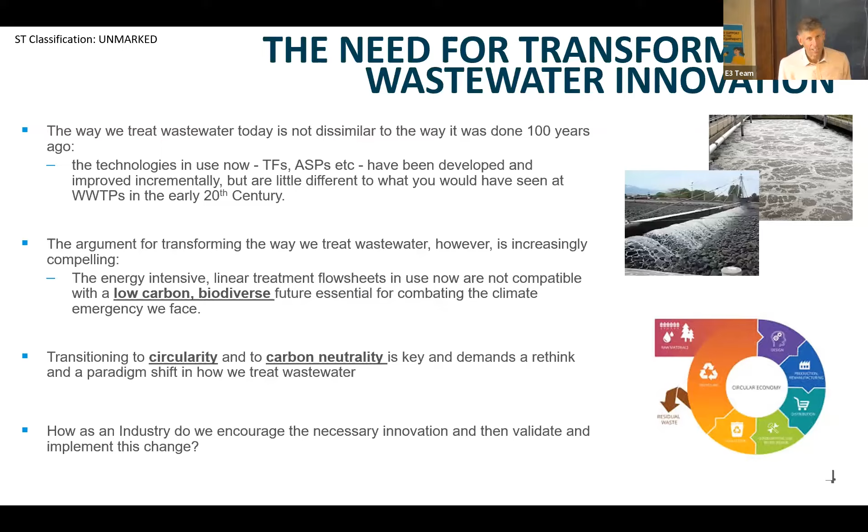A bit on carbon strategy - it's definitely not a new ambition. Back in 2007, in our strategic direction statement, we talked about minimizing our carbon footprint. But it's fair to say that the focus on carbon has intensified massively over the last few years.

Our plan now is to get to net zero, and that's in our strategic direction statement. It's part of a UK-wide, England and Wales-wide net zero route map, where we as a sector have signed up to being operationally net zero by 2030.

The reason we need to do that is because it's becoming more and more clear that the climate emergency is a huge threat. I was at Cranfield University yesterday talking to a climate professor, and it's not that we're at one minute to midnight - we're probably one minute past. If we don't act very, very quickly, we're in big trouble. The likelihood is we're going to have to learn to live with a much warmer world as it is.

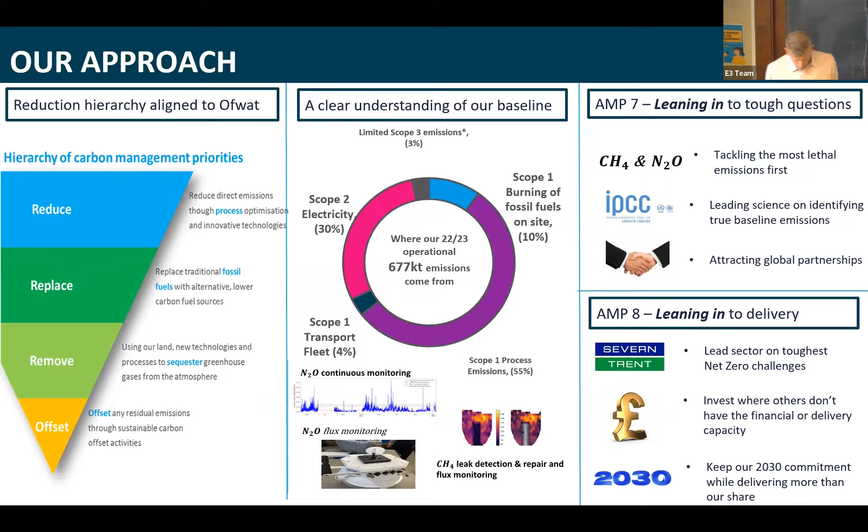So our approach very much is to collaborate to find the answers, because we know we're not going to find the answers internally. We need to get out there, scour the world, join European projects such as this one to help find those answers.

So we have quite a developed ecosystem now, and it's taking quite a lot of effort. I've already talked about the net zero partnership with Aarhus Vand and Melbourne Water. We've got a World Water Innovation Forum, with the likes of PUB in Singapore, Aqualia in Spain, a couple of North American utilities, South American utilities, and Australian utilities, where we share knowledge.

And then we've got very strong relationships with academia. We run competitions both internally within Severn Trent and with our customers to try and get ideas generated. So we're spending a lot more effort perhaps than we did historically on finding those clever ideas.

In terms of our R2IC, our Resource Recovery and Innovation Centre, that was something we built a couple of years ago - quite an investment, but it's brilliant in that it's a plug and play facility. We can bring technologies in to help speed up the development and do it at a scale that's pretty representative. So this is effectively the final step before you would fully implement on a live wastewater treatment plant.

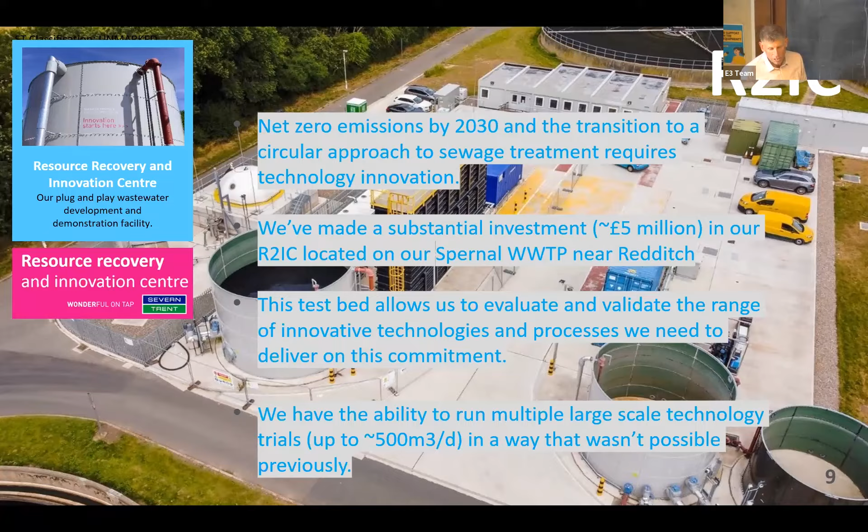It's a safe place to play, if you like, because the effluent is based on a treatment works. It's a roughly 2,000 population equivalent mini works, but we can return the effluent to the head of the works for further treatment. So we've been running a number of trials over the last couple of years.

Examples of - I'll talk a bit more about anaerobic treatment of wastewater. That's the big plant you can see at the top of the picture, an upflow anaerobic sludge blanket reactor, ultrafiltration membrane degas. But we've also done work on the CirTec cellulose recovery equipment, on enhanced primary treatment. I've got a slide to talk about the development work we did with membrane aerated biofilm reactors.

We're working with Suez on photocatalytic covers to destroy nitrous oxide. Most of our process emission monitoring work, the development work, has been done on this site too. So this is our main wastewater innovation site.

So I'll give you a couple of examples of how we can work with academia and technology providers to speed up the development of technology. I think this is a really good example of when that works well - and of course they don't all work as well. There are plenty of examples where we've done quite a lot of development work and not got to a point where we feel the technology is either feasible, viable economically, or desirable in terms of whether it fits with our strategy.

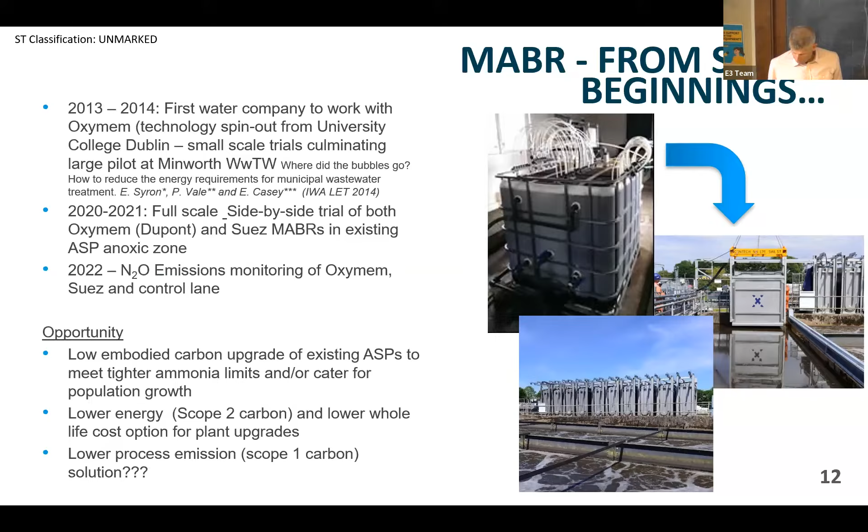So yeah, nice process. The other one I'll quickly talk about is anaerobic MBR. This offers a vision for the future, I think: energy neutral, chemical free, carbon neutral, no process emissions or minimum process emissions because you're not nitrifying, and resource recovery allows you to recover ammonia and phosphorus.

So anaerobic treatment has been around for a while, used in Brazil and other parts of South America particularly. To get it to work in colder temperate climates is a challenge. You can intensify it by having an ultrafiltration membrane, returning all the bacteria to the reactor.

And of course, that UF plant also gives you a solids-free effluent that still has the nitrogen and phosphorus in it, which you can then use ion exchange, for example, to recover. So it's a way of recovering ammonia from the mainstream rather than the side stream, which is really exciting. You're not nitrifying, so you're not producing nitrous oxide.

However, you do have lots of methane dissolved in the effluent because it's cold temperature. So you need a way of extracting that dissolved methane. We've worked with a membrane contactor technology, 3M membranes. That's the biggest challenge - I wouldn't say we've cracked that yet. There may be other options available to do that, but it's a really exciting technology still in development.

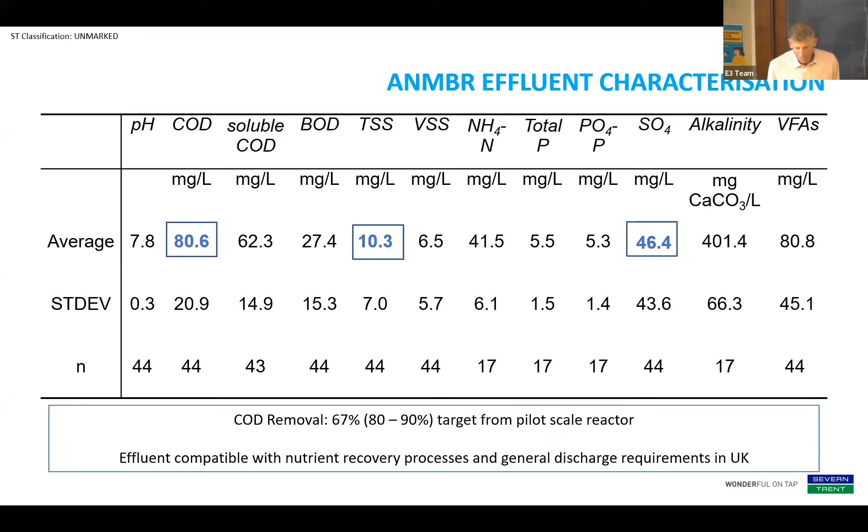So the pilot scale, mainly done at Cranfield University, shows that you can get up to 90% COD removal even at very low temperatures. We were more like 70%, and we think that's because of that sulfate challenge.

So finally, I think I'm probably running out of time - the Net Zero Hub. The culmination of all this work, I guess, is to really try it at proper full industrial scale on one of our large treatment works. And that's what we're doing now. We've secured a considerable sum of innovation funding, 10 million from Ofwat's Innovation Fund, and we're adding another 20 million to convert Strongford to our net zero works. Carbon neutral by next year is the intention.

It's important to say that it's not just the Severn Trent project, it's something that the sector is supporting. So all the UK and Irish water companies, both Northern Ireland and Irish Water, are supporting this project, as are our net zero partners. The learning is going to be shared across the sector. It's our biggest externally funded project to date, and we're now on site doing the building work with an ambitious target of getting it up and running by April 24, which is a lot quicker than most of our engineering projects.

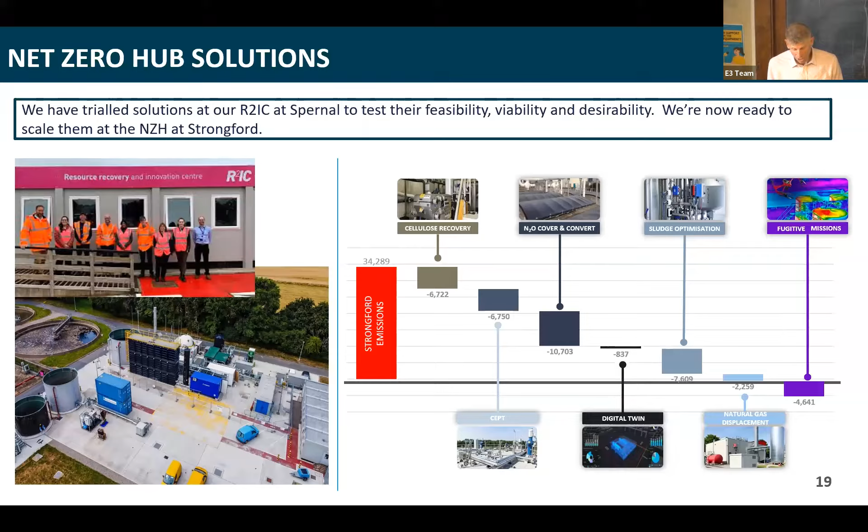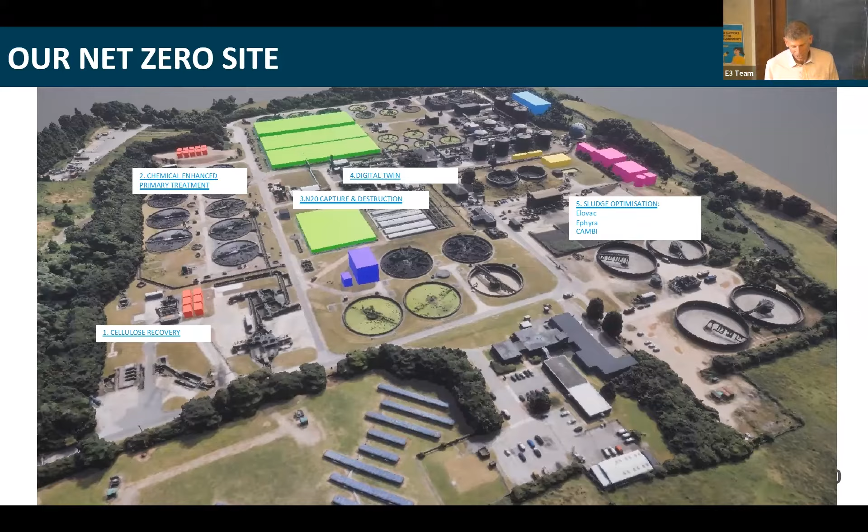That's sort of what it will look like, a bit of a mock-up, but just to give you a sense of the scale of the plant. It serves the city of Stoke-on-Trent, 400,000 population, so a really exciting project.

But we don't want to stop there, and I guess my role now is to think about phase 2. This includes some of the great stuff that you've been working on.

We're looking at advanced thermal conversion of sludge, could be cellulose as well, of course, activating that, using that to remove maybe phosphorus, maybe microorganics, forming organomineral fertilizers, recovering ammonia. There's so many links that the whole circular economy opportunity is massive.

So these are just sort of ideas really at the moment, but this is going to be phase 2 - how do we really go further to make full value and recover energy, material and water.

So in conclusion, I know I'm preaching to the converted, but it's my absolute conviction that we need to transform how we treat wastewater to be compatible with this low carbon, biodiverse future that we need. Thankfully, innovators like your good selves are coming up with loads of potential circular solutions, but we've got to be really good at collaborating to ensure widespread and rapid adoption.

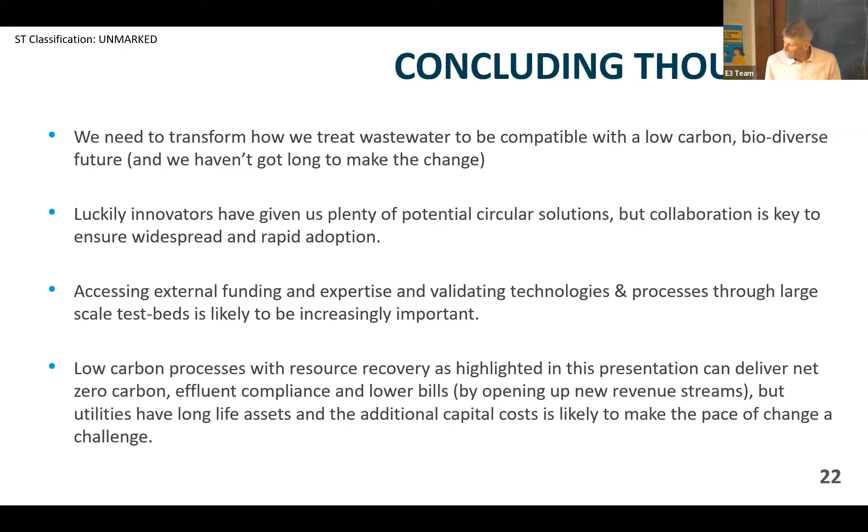Thank you, Peter. Now I'm going to sit next to you, otherwise they won't see us on the camera. Are there any questions? Because I can't see them, John. No, there are no specific questions. Are there any questions here in the audience for Pete relating to this very nice overview of all the things that are going on at Severn Trent? Yeah, I don't think so.

Yeah, absolutely, so you're right, and I recognize the BOD concentrations are relatively high. So what we could do is between the UASB and the nitrogen and phosphorus recovery, we need an additional carbon reduction step.

Possibly. So I hope people at home can hear the question, so maybe you should repeat the question before you answer it. Make it a bit more complicated. No, good point - and if I miss anything, shout out and let me know.

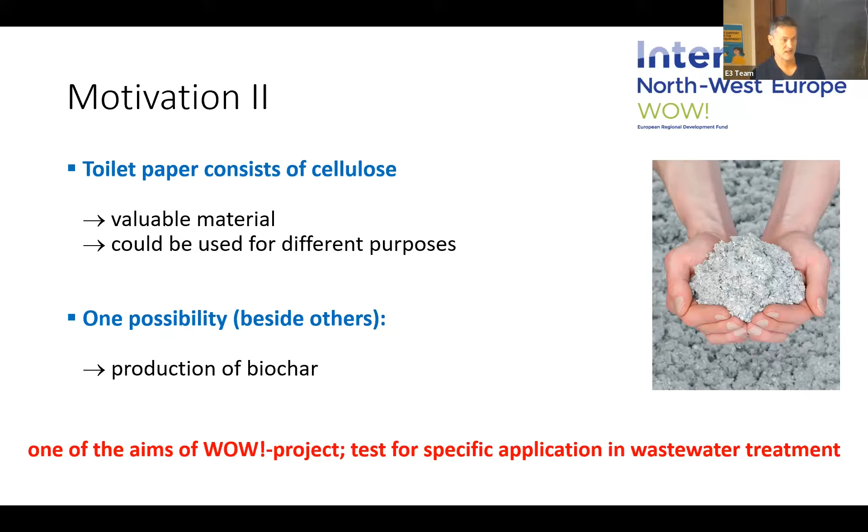But on the other hand, toilet paper also consists of cellulose, and cellulose is a very valuable material that could be used for a lot of different purposes. One possibility to use the cellulose in toilet paper is the production of biochar, and this was one of the aims in the WOW project. Our idea was to produce biochar, to valorize the toilet paper and test it for specific applications in wastewater treatment. The question now is, how can we recover the cellulose?

This is not what I'd like to show you. I'm sorry, there was something going on, but never mind.

When you look at conventional wastewater treatment, we have the possibility to install a fine screen between the primary sedimentation tank and the grit chamber. Here we have the possibility to recover the cellulose, and the main advantage of installing the fine sieve in between is that after the initial screening and the grit chamber, most particles that would hamper the further process, all the large solids but also the sand, are already removed.

Now let's come to the recovery of cellulose in the sewage treatment plant. Pete already mentioned a Dutch company named CIRTEC, and they developed a specific technology. In the frame of the WOW project, they installed that technology as a demonstration plant at a wastewater treatment plant in Ede, Netherlands, and operated it for a specific time. That technology is a four-step process.

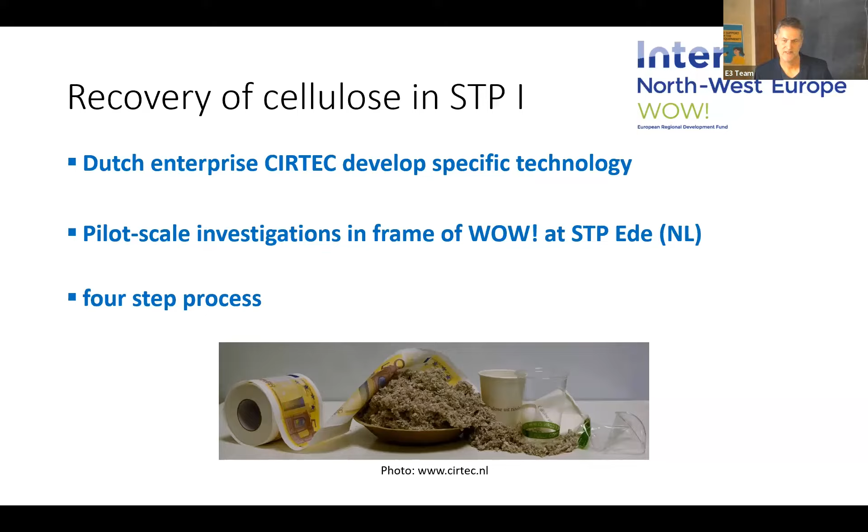The first process is the cellulose washer. I have to remind you that all the large solids, like large screenings, and also the sand, are already removed from the wastewater. But what we still have in wastewater is, for example, hairs, fibers, small plastic, and small organic particles. In that first stage, the cellulose washer, these particles are removed from the wastewater by a mixture of air and water.

The second step is a fine screen, a rotating filter mesh for capturing the cellulose. What we do is feed the wastewater onto the mesh, the wastewater drains through the mesh, and finally we have a layer of cellulose on that mesh.

The next step is a dewatering step, meaning the particles from the sieving are dewatered by a press, and finally we have a water content of about 50%.

The last and final step is a drying and pelletizing step, which means the pressed material is dried in two steps with air and flue gas, and then converted into pellets of about 6 millimeters diameter.

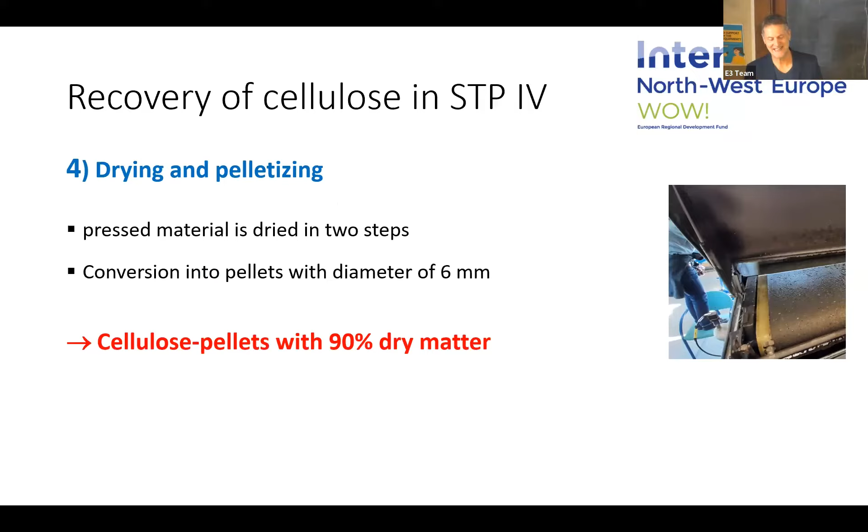Something went wrong here with the presentation, I don't know what, because this is not the picture I'd like to show. I'm sorry. But finally, what we have are cellulose pellets with 90% dry matter.

The question now is what to do with the cellulose. What we decided in the WOW project is to use the cellulose as biochar. We have different other possibilities too, as Peter also mentioned. During the process of pyrolyzation, we also get bio-oil that could be used for heating purposes or blending fuels. We get a gas, and another possibility is acetic acid that can be used for improving denitrification at the wastewater treatment plant.

But what we did in the WOW project is use the biochar as a supporting material in so-called constructed wetlands, as an additional step after the conventional treatment.

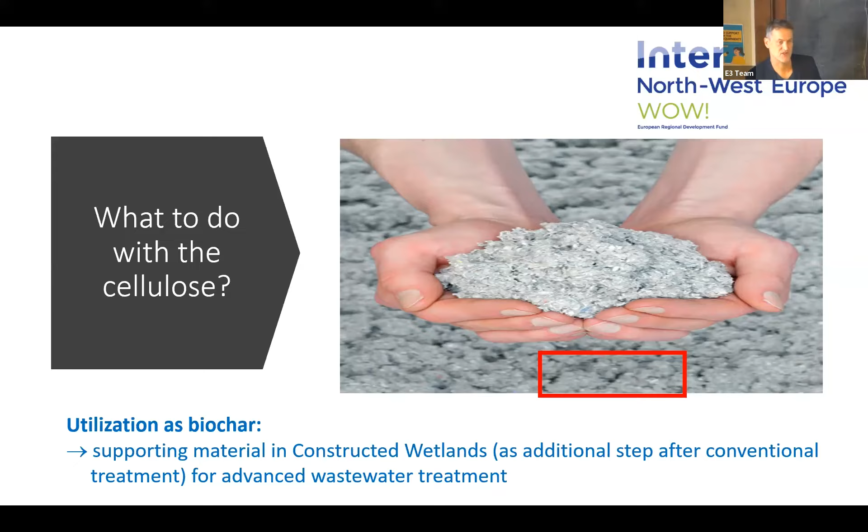With the aim of micropollutant elimination. I don't know if everybody knows what a constructed wetland is, so I'd like to briefly summarize. A constructed wetland is a nature-based system for wastewater treatment.

It's used for several purposes in wastewater disposal. Most of you may know constructed wetlands as a decentralized treatment step for small units, for example 200 to 500 population equivalents, as the main treatment step to remove BOD, ammonia, and phosphorus. But constructed wetlands are also used as an advanced treatment step for stormwater and combined wastewater. We know they are great in removing micropollutants, BOD, COD, ammonia, phosphorus, and they have a high capability to remove heavy metals.

When we started working with constructed wetlands, our literature study showed there are first approaches for the elimination of micropollutants with constructed wetlands. We started this work in 2017, so we have 6, nearly 7 years of experience, and we carried out many different projects, learning a lot from them, especially through Interreg projects: first the EmiSûre project, and the other the CoMinGreat project. Let me summarize a little what we learned.

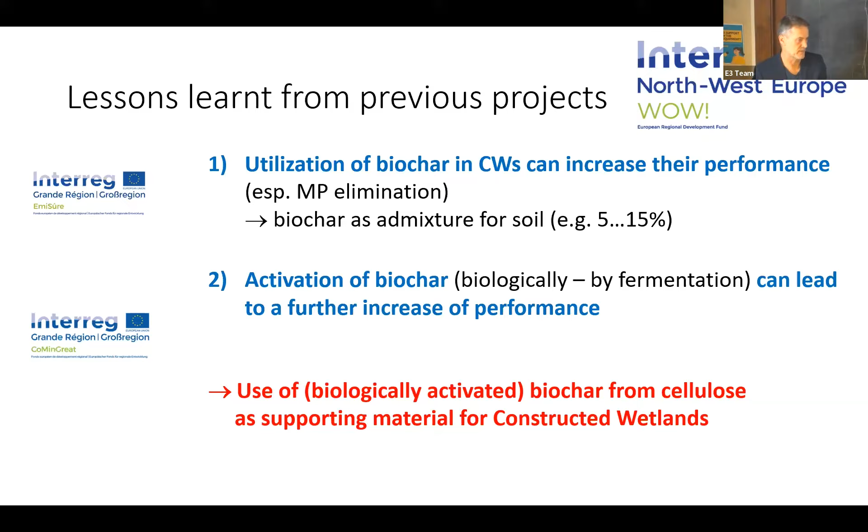The second lesson we learned is that activation of the biochar, especially biological activation through fermentation, can further increase performance. So the idea of the WOW project was to use biologically activated biochar produced from cellulose as a supporting material in constructed wetlands. These constructed wetlands are used as an additional step for targeted micropollutant elimination in wastewater treatment plants, especially for small and medium-sized plants.

Coming back to our wastewater treatment plant, what we have are these cellulose pellets, 6 millimeters, 90% dry solids. Now we have to valorize these pellets, valorize the cellulose. In the frame of the WOW project, these cellulose pellets were transported from the wastewater treatment plant of Ede to a small German company called Klimapharma for valorization.

Klimapharma has a lot of experience with biochar, and in our discussions, based on their experience, they proposed producing 3 different types of biochar: first, biochar made from 100% cellulose; second, biochar made from 50% cellulose and 50% straw; and the third option, 50% cellulose and 50% wood.

Now we have to valorize the cellulose pellets, and this is done in 2 steps. The first step is a carbonization step. On the sheets we saw, for example, pyrolization - it's the same as carbonization, a well-known process for more than 100 years used for the production of charcoal, for example.

What Klimapharma does is carbonize at low temperature, between 600 and 800 degrees. The reason is to reduce the loss of organic material, because when you carbonize at very high temperature, you go more in the direction of biofuel and gas, and you lose a lot of organic material and lose the biochar. The residence time in the reactor is between 2 and 6 hours.

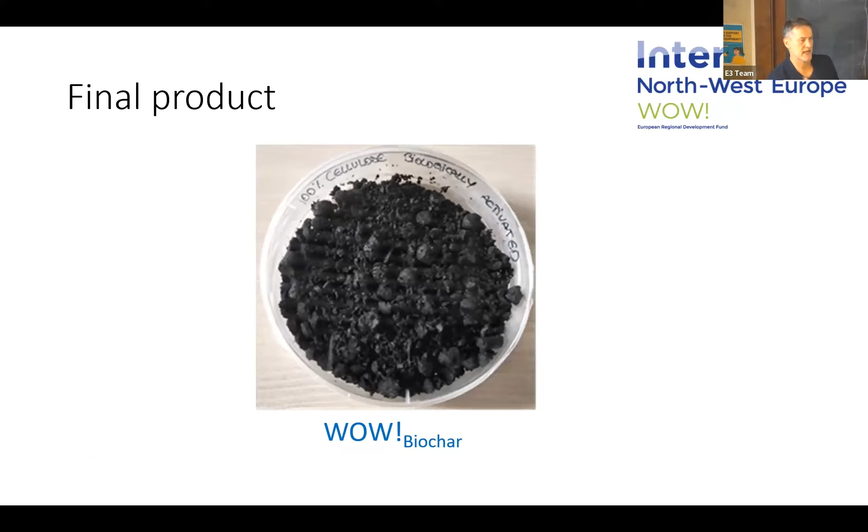And this is the final product, which we call Biochar. So we have 3 different types of biochar: the biochar made of cellulose, and the 2 types mixed with straw and with wood.

Okay, the question now was, which kind of biochar should we use? The cellulose or the mixtures? Okay, what we decided was to make some pre-tests in the lab.

When you look at the processes and mechanisms in a constructed wetland, you can see the removal is based on several processes. For example, we have photodegradation by sunlight, and uptake of pollutants by the plants. But the main processes for micropollutant elimination are adsorption by the soil material and biodegradation by bacteria, which mainly takes place in the first 15-20 centimeters of the soil, because here bacteria, fungi, and plants work closely together to remove the pollutants.

So what we decided is to make some pre-tests in the lab for adsorption capacity, and I'd like to show you some results afterwards, and also for the biological removal capacity of the material we used.

I'd like to explain briefly what kind of experiments we did in our lab. First, we did adsorption tests with batch tests on a shaking table. The purpose was to look for general removal rates for a dye, indigo carmine, as a proxy for the micropollutants, but also for selected micropollutants. So the aim of the batch test is to look for the removal rates - what is possible to eliminate regarding micropollutants and dye.

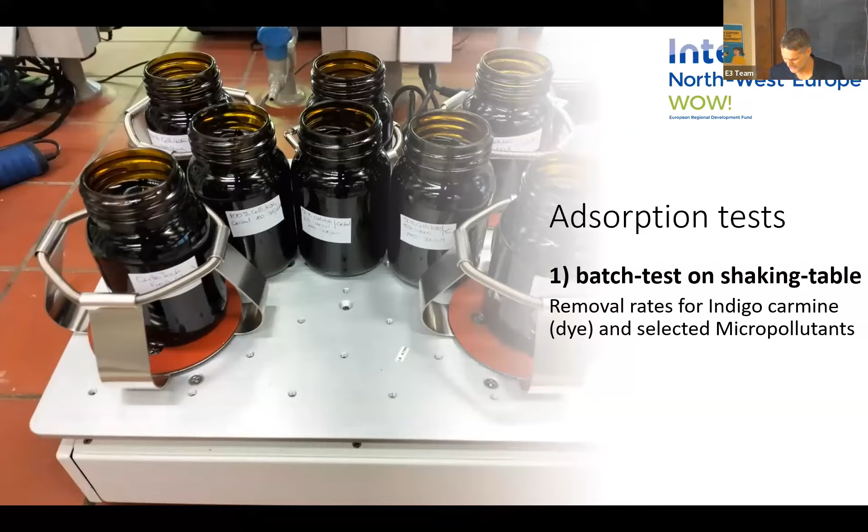The second test we carried out in the lab was a continuous test with a facility called a rapid small-scale test. I'm really sorry, I don't know what happened with the presentation. But the idea of that rapid small-scale test is to look for the long-term performance of the removal, so what we see are so-called breakthrough curves, and I'd like to show you an example afterwards.

To summarize, we tested indigo carmine dye and selected micropollutants. We did tests with non-activated and activated material, also in different sizes - for example very fine material to simulate powder activated carbon, but also coarser material to simulate granular activated carbon. And we did tests with pure cellulose and with mixtures of cellulose with straw, and cellulose with wood.

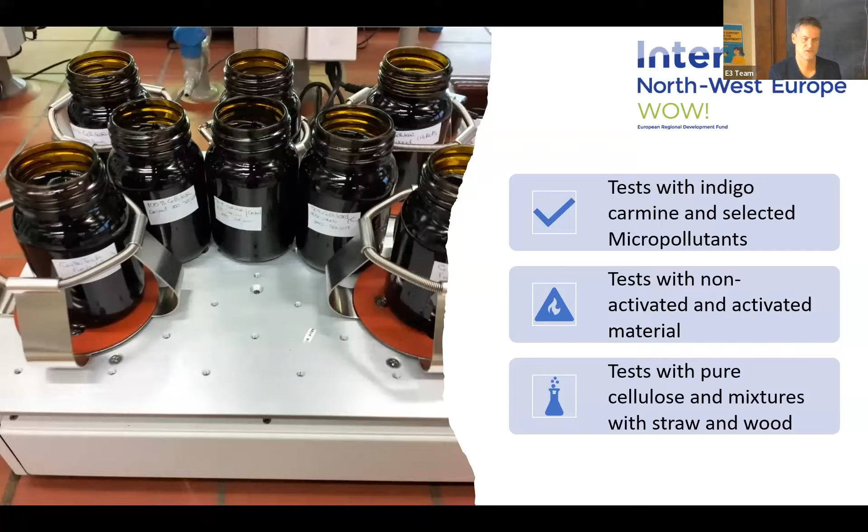To summarize, we saw that the mixture of cellulose with wood had the lowest adsorption capacity for indigo carmine and also for the micropollutants. The 100% cellulose and the mixture of cellulose with straw showed similar behavior for adsorption. But what we finally saw is that the mixture of cellulose with straw showed the best performance for the combination of adsorption and biodegradation.

So finally, we decided to carry out further tests at another scale - in mesocosm, but also in a pilot scale on a wastewater treatment plant - with that mixture of cellulose and straw and with the activated material. The results will be presented by my colleague Venditti afterwards.

To summarize, cellulose is a valuable product that could and should be extracted from wastewater. It's very easy to integrate the technology into the conventional process of wastewater treatment. By carbonization and biological activation, it's possible to produce an activated biochar, and that biochar can be used for different purposes, for example for micropollutant elimination from wastewater in constructed wetlands.

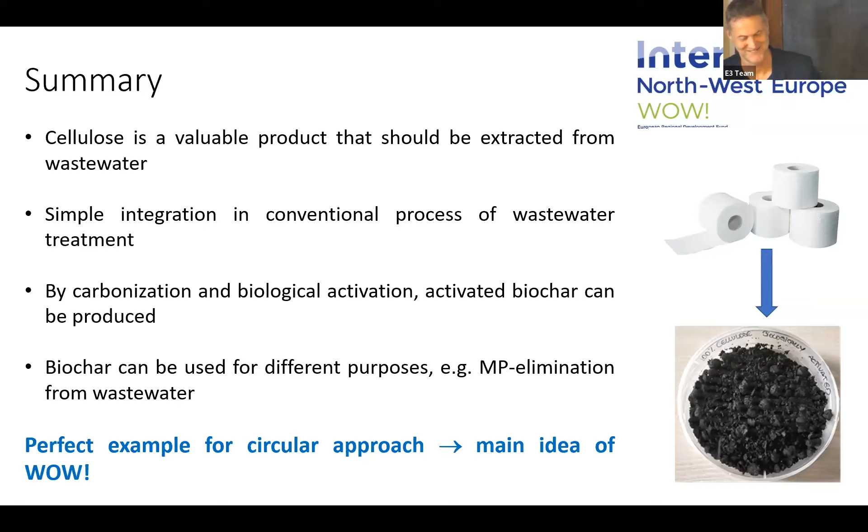Thank you for your presentation. So when you are mixing cellulose with different ratios of wood and also straw, why do you think straw is performing better than wood? Is there any structural difference, or the humus behind it, or? So the question is if Jo can explain why the combination with straw gave the better results with the elimination.

What we saw, for example, is that the active surface changed. The active surface was higher when we mixed the cellulose together with other compounds, and the active surface is very important for the adsorption capacity. I think the other thing is that in a constructed wetland, we have to offer the bacteria and fungi good conditions. You can imagine that cellulose is a quite inert material, and when we mix it with a more living material, that may offer better conditions for the bacteria and fungi in the constructed wetland. Because what is very important for removal in a constructed wetland is really the combination of different processes. It's not only adsorption, because otherwise we would have used classical activated carbon or something like that.

But we know from our experiments that especially the biochar produced, for example, from plants, or in this case the mixture of cellulose and straw, gives ideal conditions for the bacteria. And this is the reason, I think, why.

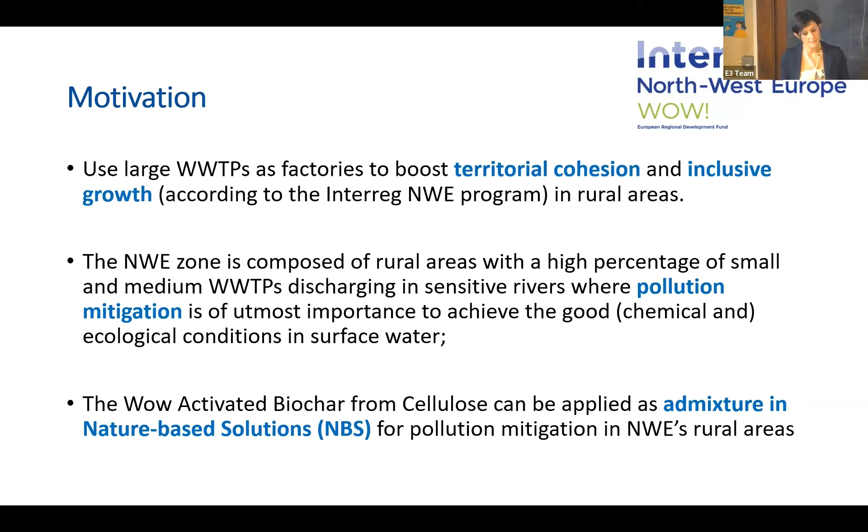So why nature-based solutions, and why am I speaking about them? I'm reporting here the definition of the Commission. They are innovative approaches that have to regenerate areas affected by human activities. And how do we do that? We want to restore the basic key ecological functions to improve our life. This is a very romantic aim. I'm out of the technology now.

Why? Micropollutants can pose a risk to the aquatic system even if present at very small concentrations. They are pesticides, pharmaceuticals. Probably everybody knows diclofenac, the active ingredient of Voltaren. You are running, you know. Yeah, I do know. Luckily I still don't use it, but I think everybody knows what micropollutants are: herbicides, pesticides.

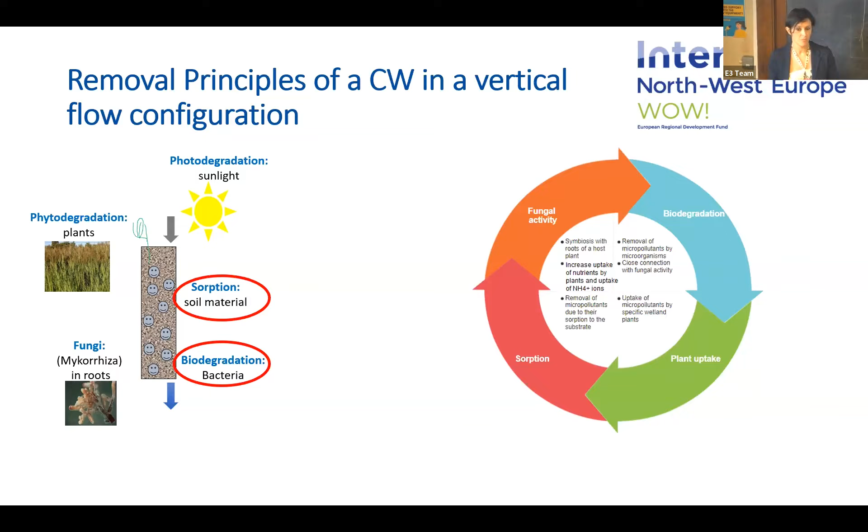But there are a few things that we can choose. One of them is the soil that we want to apply, so maybe we can have an influence on the sorption mechanism. And how do we do that? We use, in the past and now, an admixture.

So maybe not everybody remembers, but the University of Luxembourg had a completely different role in the WOW project in its first phase. There we were producing biodiesel from enriched sludge, where Microthrix parvicella, filamentous bacteria, accumulate lipids. So why are we now in the capitalization phase with a topic that is completely different, constructed wetlands, nature-based solutions?

As Jo said, we've been working on this since 2017. Why? Because Luxembourg belongs to what we call the Greater Region. The Greater Region has quite a few issues in terms of micropollutants, because we mainly have small and medium-sized wastewater treatment plants. If you implement an ozonation reactor as a post-treatment step for removal of micropollutants, the costs are huge, the energy consumption is huge. So where possible, it's needed to look for something with a lower footprint and carbon impact.

And so we have these two Interreg projects, and again we want to make a bridge between what we achieved in the rural area, in the Greater Region, with another program, and what we did in WOW, in the large wastewater treatment plant factory.

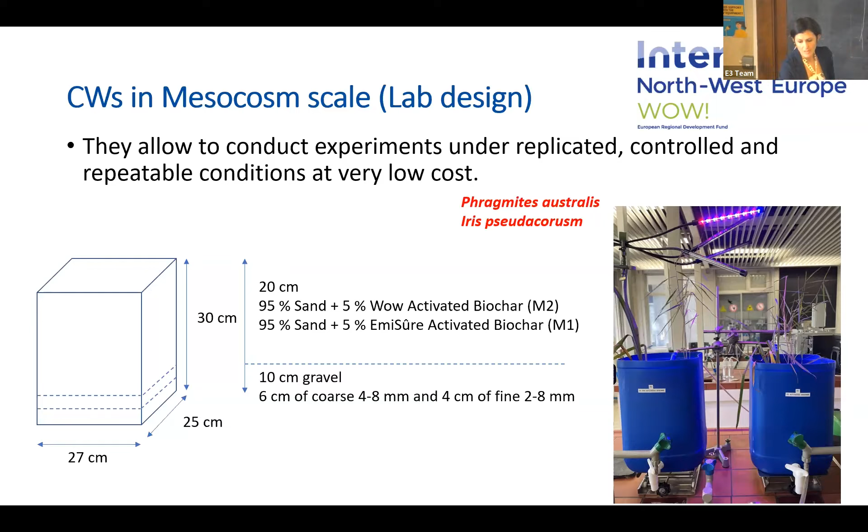So the first step was to decide what we are measuring. We defined a first list of compounds, 28 compounds, to measure with LCMS, so with mass spectrometry target analysis. We have 16...

pharmaceuticals, diclofenac, ibuprofen - everybody was using ibuprofen once, I think. We have a set of antibiotics, beta blockers, hormones, but we also have one fluorosurfactant, PFOS, which was most known in our previous monitoring.

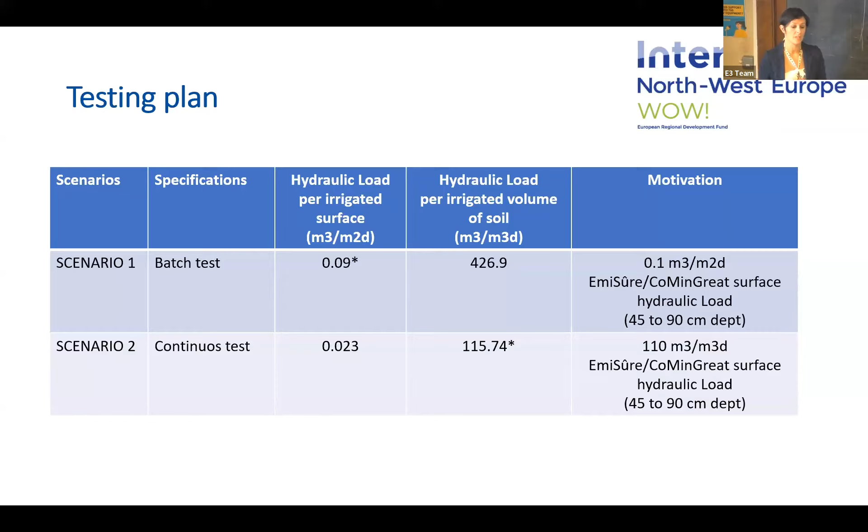In the previous project, we were using 100 liters of wastewater irrigated per square meter of constructed wetland surface per day. But we had a depth of soil of 45 to 90 centimeters, and now we are talking about 20 centimeters, so we were also refilling only to the volume of the soil.

So just to give you an impression of why we were watering every 3 days: the mesocosms were getting water only on the first day, then they were draining, and on the third day they had no water at all - they were just resting.

This is because there is a wastewater treatment plant in Germany called Rheinbach, where you have 3 segments. This wastewater treatment plant has constructed wetlands as a post-treatment step, where every segment is watered every 3 days. So we really wanted to see if we can get better removal, just reproducing the conditions that are already in one of the wastewater treatment plants.

Another important finding is that there's no difference in performance between the soil with activated biochar and the soil with the activated biochar from our previous project, EmiSûre. So the WOW biochar produced from cellulose seems to have the same performance as the biochar we used previously. Here you see the 12 compounds. The general elimination is about 90% for the biochar produced from cellulose, which is slightly lower than the 94% of the biochar we used in the previous project. So really, the activated biochar from cellulose shows very, very high performance.

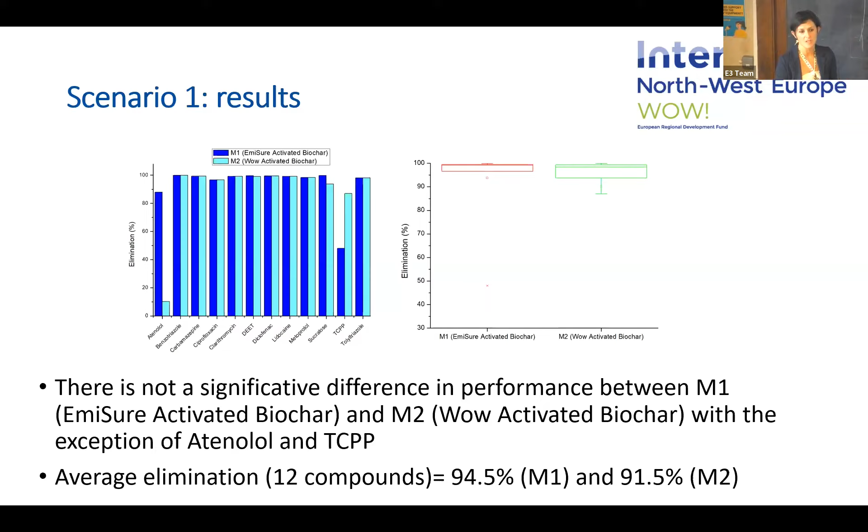What's also important is that for the flame retardant TCPP, where we showed in the previous project that the elimination was quite low, we have consistent results. So still lower elimination.

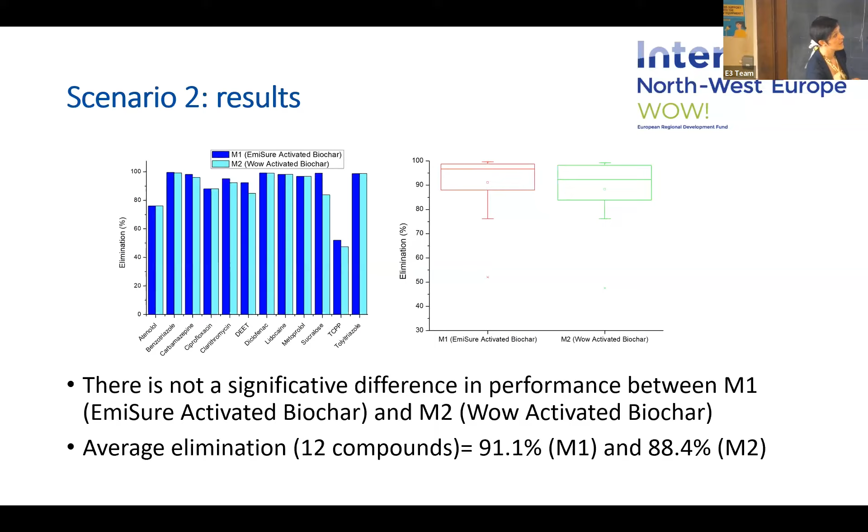Finally, we saw that when we operated the mesocosms continuously, watering them every day, 2 times a day, we have similar results. Here you see the average removal over 5 months of operation is very, very high, except for TCPP, the flame retardant. We are above 88% for the activated biochar from cellulose for 12 compounds, very high, and very similar to the biochar we used in the previous project.

But what's more important is how we translate these results into policy. In 2020, Luxembourg released the first guideline for micropollutant removal. 13 wastewater treatment plants in Luxembourg were considered eligible to get funding for a post-treatment step with any kind of technology. The legal requirement was to comply with 80% elimination for 4 mandatory compounds: diclofenac, carbamazepine, clarithromycin, and benzotriazole. Carbamazepine is an antiepileptic.

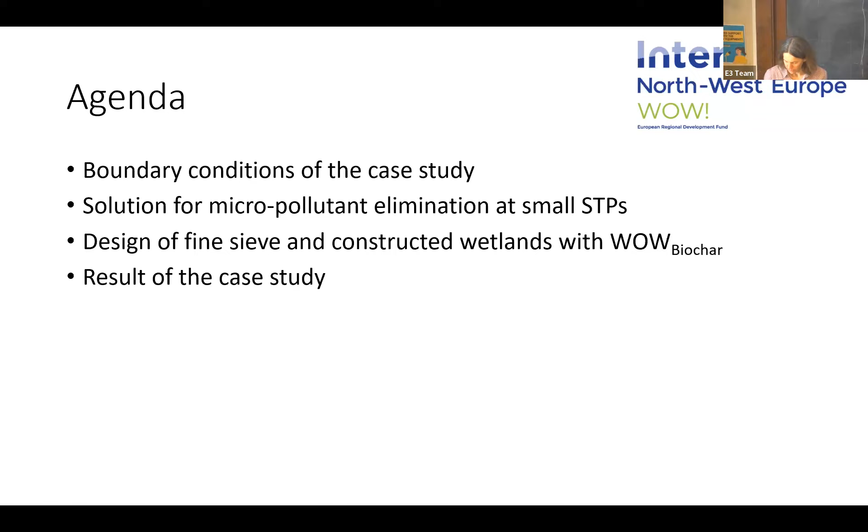The treatment plants discharge their wastewater most of the time into small water courses, and sometimes directly close to the source.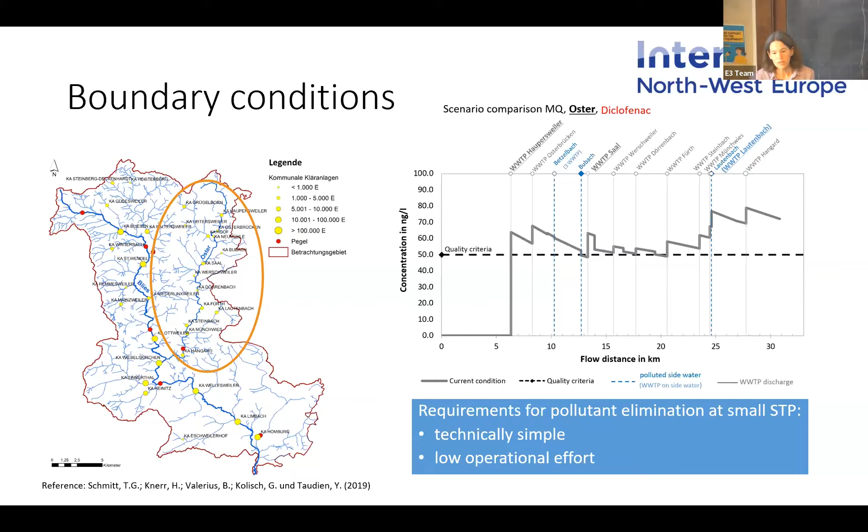So here you see that we need possibilities for small wastewater treatment plants to improve the effluent, and the requirements are, of course, that we use something technically simple, and the other point, a system with low operational effort. I think the constructed wetlands fulfill both points, so that you can install them and you only have to check often to see if it works, but there's not a lot of work to do to keep them working.

So we decided - we did different scenarios, but I only want to show one scenario where we install 2 to 3 fine sieves. It depends on the aim you have, to recover the cellulose at bigger wastewater treatment plants - these are the orange circles. There we use the cellulose to produce directly the raw biochar for the constructed wetlands in the same catchment area. And the green circles are where we will implement the constructed wetlands with biochar, at small wastewater treatment plants smaller than 5,000 inhabitants.

So what is the aim of where we want to install the fine sieves? It's at a location where there's no primary clarifier and also no digestion. Because if we implement the fine sieve, we take the primary sludge out a little bit, and so we no longer have sludge for the primary digester. So the 3 locations at the bigger wastewater treatment plants we chose are where there's no primary clarifier and no digester, so we can take out the cellulose there as a resource for the biochar production for the constructed wetlands.

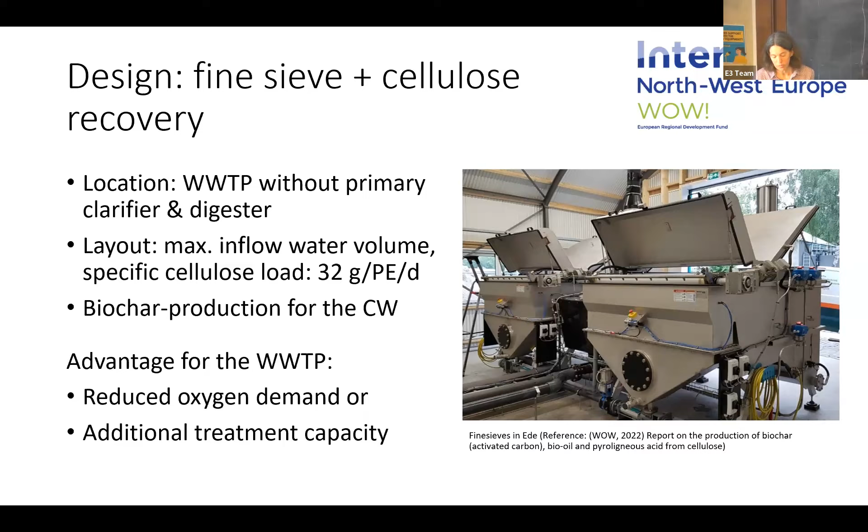So for the design of the constructed wetland, here you see one wastewater treatment plant - in this figure it's the wastewater treatment plant Haupersweiler. It's about 3,000 population equivalents. And as Sylvia told, there are 2 different designs for the constructed wetland. It's a surface load that should be around 0.2 cubic meters per square meter a day.

And this wastewater treatment plant has a lot of infiltration water, so we need 7,800 square meters - sorry, not cubic meters. So you see it's quite big. So as a first step for this wastewater treatment plant, we would suggest that they reduce the infiltration water, because here you see the normal design: when you don't have a lot of infiltration water or water from the sewage from rainwater, you only need 0.4 square meters per population equivalent. So this would be 1,200 square meters, and you see it's always the same size as the wastewater treatment plant shown here - it's an activated sludge system.

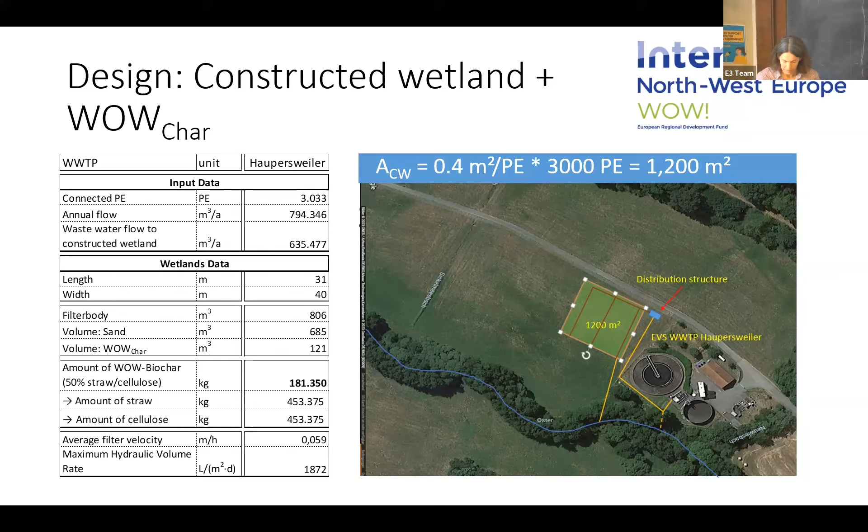And if we want to be below for all variants, we had to install it at each wastewater treatment plant.

So the question is, of course, the economic one: how high are the costs? It depends on the infiltration water, or how much water comes from the rain. If it's very high, then you need higher costs. So we are still now in the calculation phase.

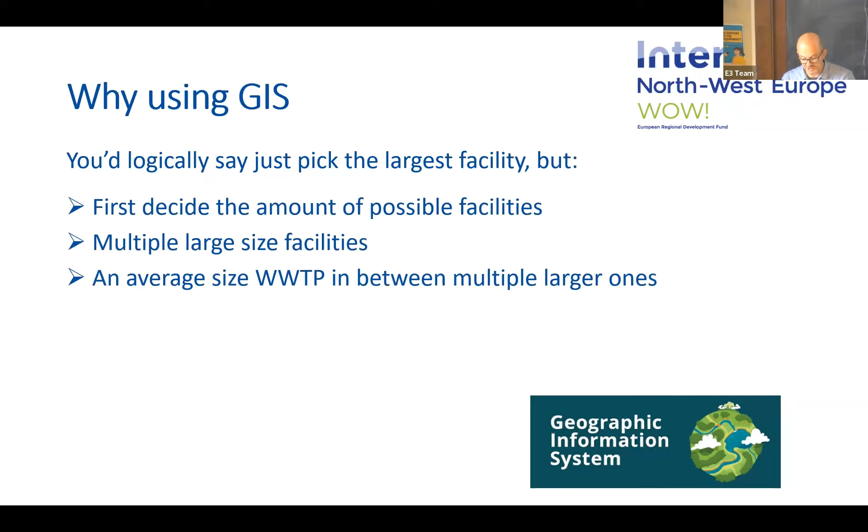But we always think you have to first decide on the amount of possible facilities. How many facilities do you want or need? Do you need multiple large size facilities? You also have to look at the average size wastewater treatment plants in between multiple larger ones, and how you deal with this aspect. There's always an equilibrium between the size of the sewage treatment plant and the distance you want to travel, because distance is money. It's not very sustainable to transport a lot of sludge from one location to another. Also, what's the optimum capacity that you want for a PHA production facility?

So when we looked at the possibilities to set, what we did is look at maximum distance, maximum facilities, and also the ideal amount of total capacity that you want for a sewage treatment plant or for a PHA production facility.

With GIS, it's a software where you can calculate as much as you want. You can also get lost in that, I know from experience, but it's a good tool to do the selection.

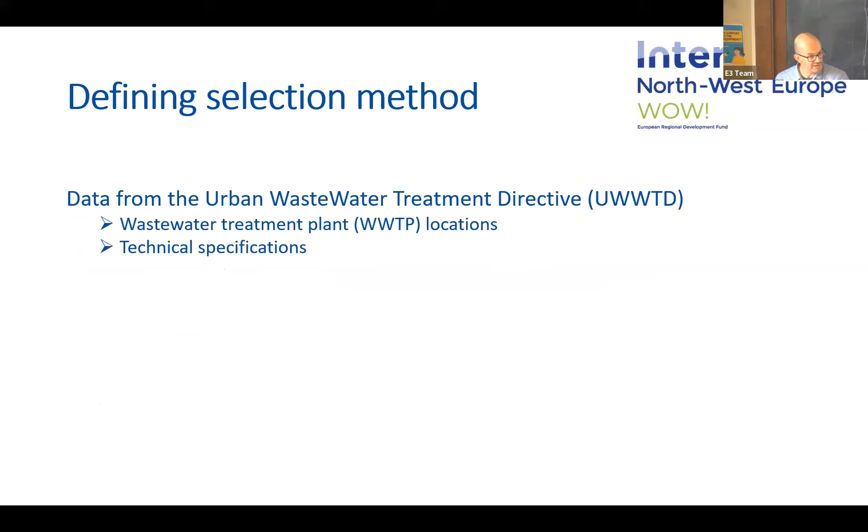When we look at defining the selection methods, we got data from the Urban Wastewater Treatment Directive. So we have the wastewater treatment locations in Scotland, and also the different technical specifications. One of the requirements we set was that we needed 2 million people equivalents for a feasible PHA production plant, because then you produce about 5,000 tons of PHA per year. That's the outcome we had from the previous WOW project, the first WOW project. So that's one of the starting points.

We considered all wastewater treatment plants with a primary treatment, because you use the sludge from the primary treatment for your PHA production. And we only looked at wastewater treatment plants with a capacity bigger than 50,000 PE.

To make it a bit more complicated, what you can do is transport wet primary sludge, but then you're transporting a lot of water since it's only about 5% dry matter. So what you could also do is have a dryer installation on site, dry the primary sludge first, and then transport it, which means less transport. In this case, the cutoff criterion is that wastewater treatment plants bigger than 2,000 people equivalents can have a dryer location on site.

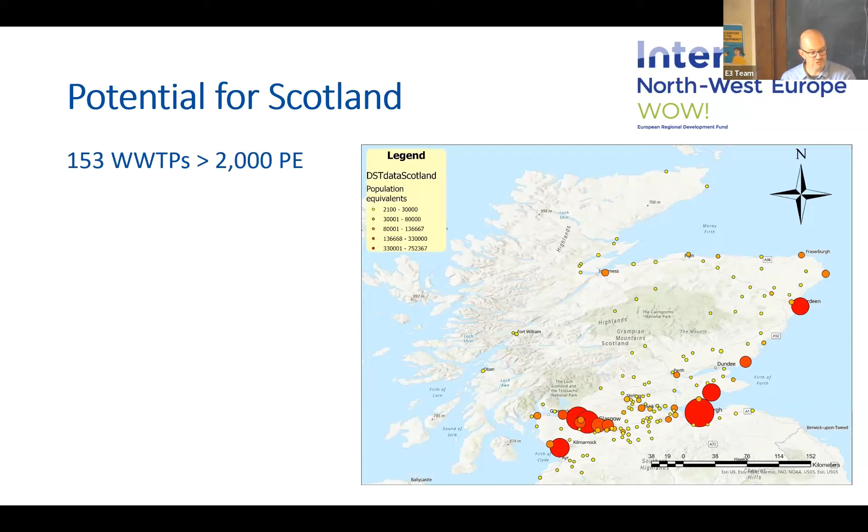Let's go to some pictures to make it a bit more visible. If you look at the potential for Scotland, here you see an overview of the different sewage treatment plants in Scotland. The bigger the circle, the bigger the amount of people equivalents for that sewage treatment plant. To give a few numbers, we have about more than 150 sewage treatment plants bigger than 2,000 people equivalents.

In total, there's 6.1 million people equivalent in Scotland. So that would mean, going back to the 2 million needed for a facility, you would have a maximum of 3 facilities in the whole of Scotland. That's the simple calculation. I also told you about bigger than 50,000 PE.

That's about 27 wastewater treatment plants. But if you only consider those, not the ones bigger than 2,000, but only bigger than 50,000, then you already lose 1.5 million people equivalent.

So you're only left with 4.6 million people equivalent. That would mean, if you keep that criteria, that you only have 2 facilities in the whole of Scotland.

To give an idea, shouldn't be a surprise if you know a bit about Scotland, that we have 3 cities, or in this case 4 wastewater treatment plants in 3 cities, that have the biggest capacity. We have the one in Aberdeen on the east coast, the one in Edinburgh also on the east coast but a bit more southwards, and 2 in Glasgow on the west coast of Scotland.

If we look at those 3 different locations, for Aberdeen we striped that off, said no, that's not a good location, because the people equivalent accounts not over 900,000 PE within 160 kilometers. So that's the reason why that fell off as an option.

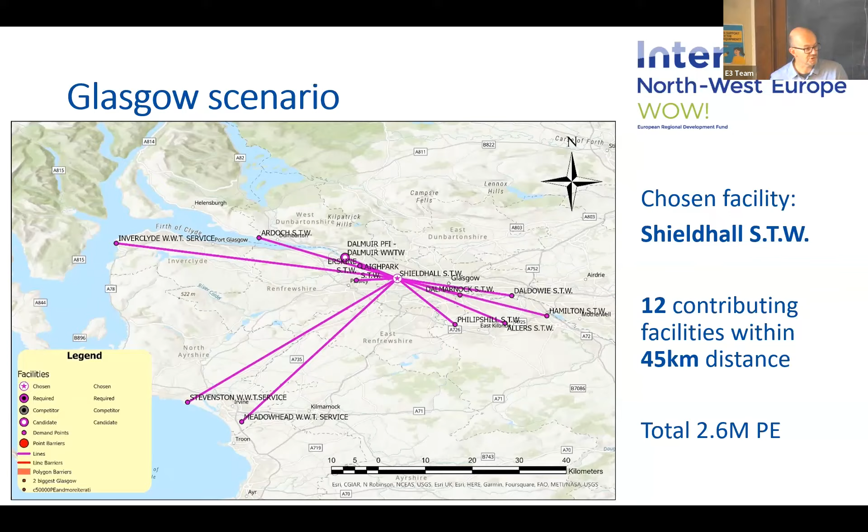Here you see the amount of travel that would be needed. This location was chosen because of the shortest travel distance when you look at the scattering of the different facilities. They are listed over here - so here you see the 12 contributing facilities within the 45 kilometers distance of traveling.

In this case, that would be when you look at the scenario of 2 million people equivalents transporting primary sludge.

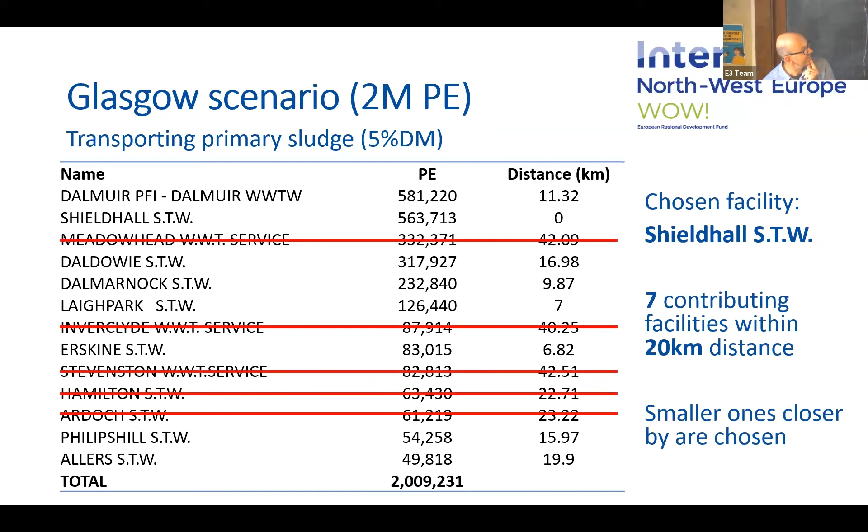Again with the chosen facility, the Shieldhall sewage treatment plant, you can stripe off the smaller ones because you want an optimum of 2 million people equivalents. So we lose 600,000 people equivalents because that's the optimum scenario of the PHA producing facility. Then when you go towards the 2 million people equivalent, you see that the travel distance is shortened to 20 kilometers instead of the 45.

Then the overall picture of this scenario, 2 million people equivalent transporting primary sludge, so a lot of water. In this case, with the 7 facilities, you come to a total transport amount of 180,000 kilometers per year that you would be traveling your primary sludge to the central location. Obviously that has an effect on economics and on circularity, and as I said, that will come back later with the other presentations.

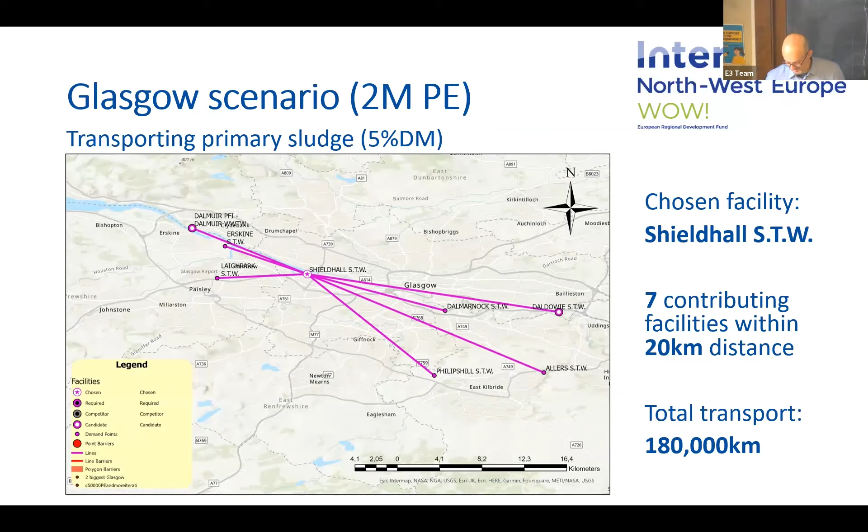You also have the other option, as I told you. What you could also do is dry the sludge at the facility before you start transporting it, so you have less to transport, but then you have to build a dryer location at different treatment plants, which has an economic effect again. So that's the other scenario that we looked into.

In this case, we only transport dried sludge of facilities bigger than 300,000 people equivalent, and then you come to 4 contributing facilities within a 42-kilometer distance. Here you see the ones that drop off because they are smaller than 300,000 people equivalents. So that's what you end up with.

Then you see that the chosen facility is still the same. You have 4 sewage treatment plants which contribute, which all have their own drying facility. There you still have 2 million people equivalent that you need for the minimum PHA facility. And then you also see that the amount of kilometers you have to travel drops a lot, because you come from 180,000 to only 16,000 kilometers that you have to travel your sludge.

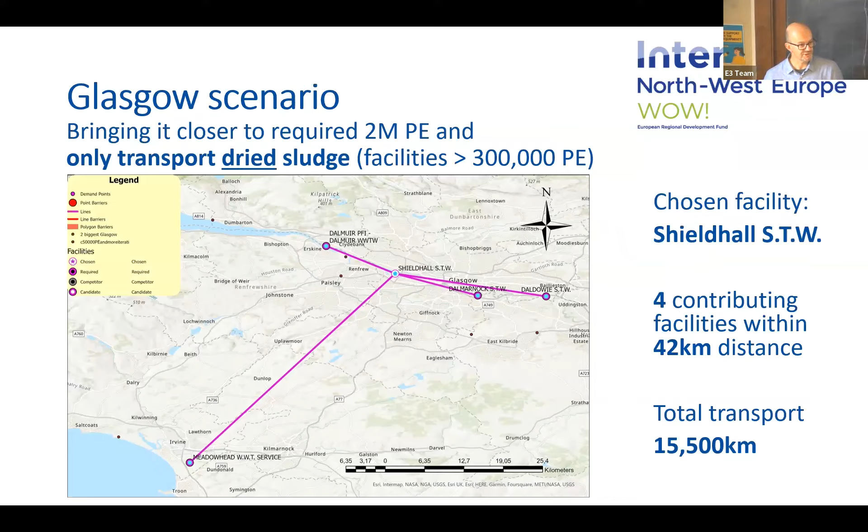Well, and these two scenarios, those are the ones we used also for the economic analysis. So this gives you an idea of what you could have for Scotland. And we also did the same analysis for Ireland, and one for the Saarland region in Germany. So those were the different scopes that we had.

If you're interested in the outcome, and also a much more elaborate explanation about the whole GIS exercise that we did, you can find the reports on the WOW website. I think in a couple of weeks they should be there.

And the further steps - so this was the starting point for us. The further steps were the financial analysis of the different scenarios, as I already told you, and also the circularity analysis that we did using these scenarios. Both of them will be presented later on during this session.

And then I'm already at my last slide, and well within time, I see, so that's nice. It's already been said a couple of times before, but these are the partners we worked with, and we couldn't have done this without them, so that's very nice to mention. And then, yeah, I can only say - are there any questions which I may be able to answer?

So perhaps I will ask the audience if there are any questions, to allow Jappe a moment.

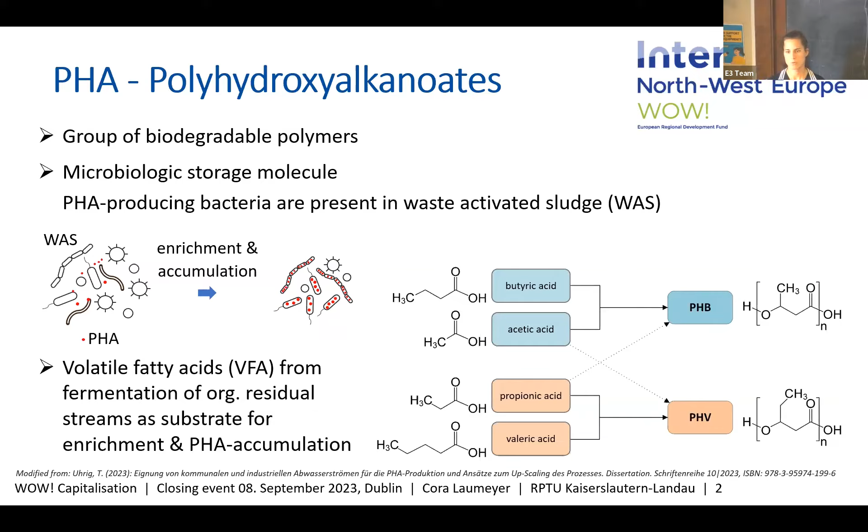We start with the acidification process, which is the first stage. Here we put the residual stream into anaerobic conditions, producing a VFA-rich fermentation liquid that we can then use as feedstock in the later process. To do this, we separate the solid and liquid phase to reduce the amount of dry matter and obtain a VFA-rich stream that we can easily use for PHA production.

In the second step, we start with enrichment, taking the excess sludge from a municipal sewage treatment plant, or as we did in the capitalization process, from an industrial site—often they have industrial sewage treatment plants—and use the excess sludge as an inoculum, basically as a first starting culture. From there, we develop it.

We have a certain feeding regime called feast and famine. One time they get a lot of organic acids and feed on this, giving them a selective advantage over the bacteria that cannot accumulate it. Therefore, we enrich the amount of bacteria able to produce PHA.

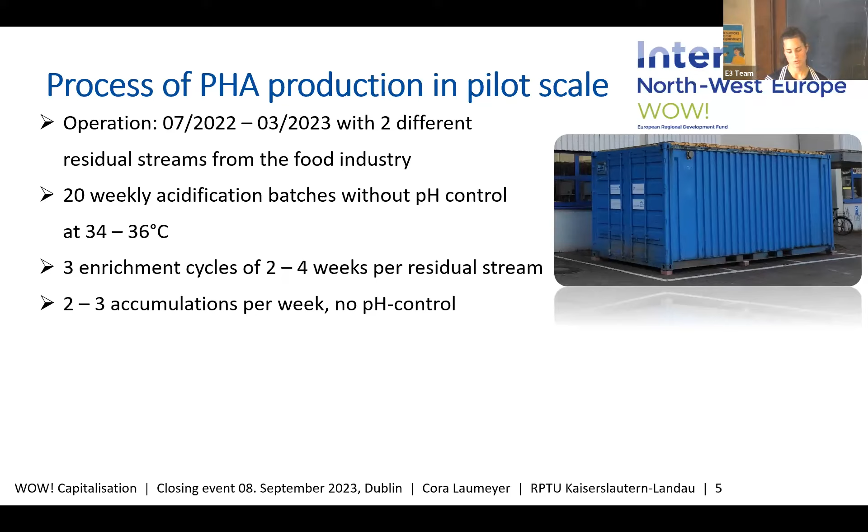So the process of PHA production at pilot scale was operated for quite some months with 2 different residual streams of the food industry, I will come to that in the next slides. In total, I did 20 weekly acidification batches without pH control at 34 to 36 degrees centigrade, keeping it nice for the mesophilic bacteria. I also did 3 enrichment cycles of 2 to 4 weeks per residual stream, with 2 to 3 accumulations per week, without pH control.

So this is what the process you saw before looked like in the pilot plant. Just a quick snapshot. And as mentioned before, all the details will be in the report on the homepage.

The objectives of the pilot plant operation were to investigate different residual streams of the food industry for PHA production at pilot scale. Before we went to pilot scale, we did screening experiments together with our partners at Avans, researching 7 different residual streams that we can use. It showed that brewery substrate, like the effluent from a brewery, is very feasible, so we started with that one.

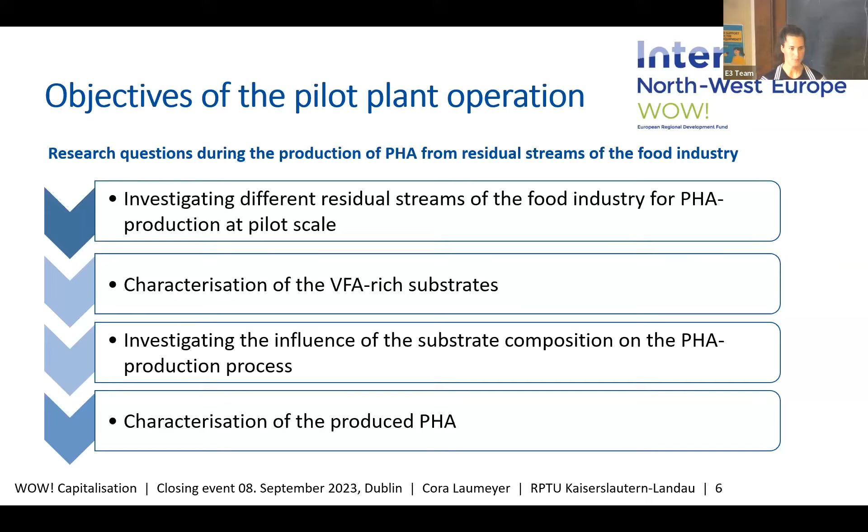And the next residual stream that we used was from a fruit juice company. We also wanted to characterize the VFA-rich substrate and see differences from the different residual streams, investigate the influence of the substrate composition on the PHA production process, because as we know, there will probably be one, and to characterize the produced PHA.

So coming to the residual streams, the properties of the first residual stream that we used was from a brewery, and this brewery is operating all year. So the whole year they are producing this residual stream, and they also have an on-site treatment and a buffer tank. And as everybody knows, when you have a buffer tank, you at least get kind of the peaks usually out of the system.

And with the produced substrate that we achieved, we saw that the carbon to nitrogen to phosphorus ratio, which is usually aimed for to be 100 to 5 to 1, was quite suitable, because here we had a C to N to P ratio of 100 to 2 to 0.8. And also, as I said before, we had around 70% of the soluble COD that was represented by the VFAs.

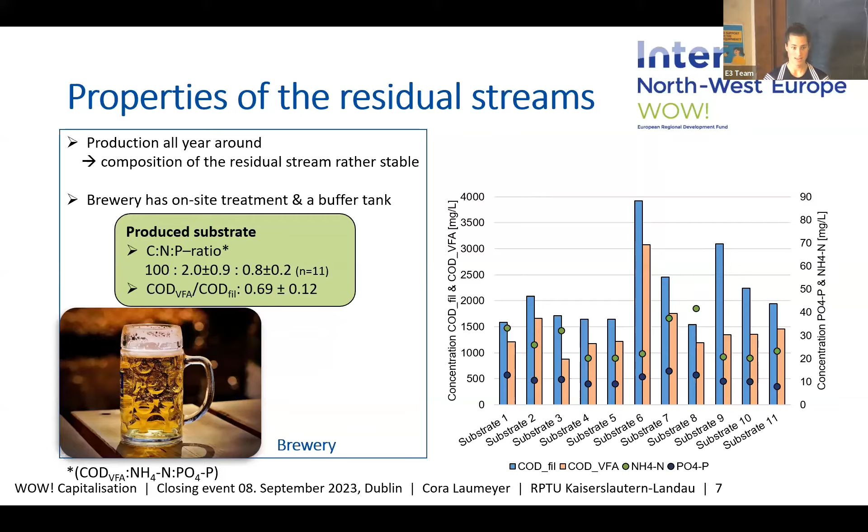Now when I change to the next slide, have a look at the concentration scale of the COD, because it will go up now by 10,000. Now we're talking about the fruit juice, which has very different properties.

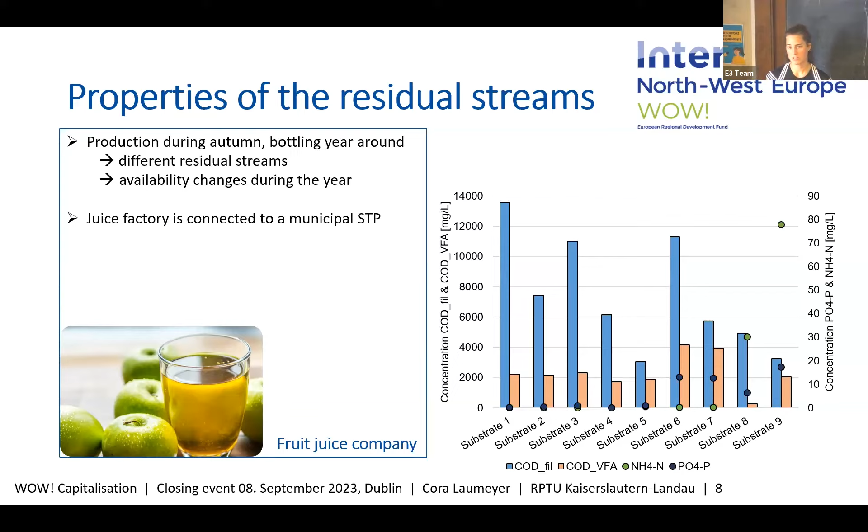First, it's a campaign, since apples are not growing all year round - unfortunately we have them in autumn. So right now they are producing, but bottling the fruit juice happens all year round. This means there's a difference in the residual streams during the fruit juice campaigns versus bottling, so the availability changes during the year. Also, this juice factory does not have on-site treatment but is connected to a municipal sewage treatment plant, so also no buffer tank.

The produced substrate here looks very different. If you keep in mind the favored C to N to P ratio, you'll see we might have a problem, because looking at all the dots lining up around zero for nutrient concentration, we experienced problems - there was not enough nutrients for the bacteria to grow on. During the experiments we realized we need to add nutrients, otherwise this is not a feasible feedstock for the production of PHA.

Also, compared to the brewery substrate, the amount of VFAs from the COD is a lot lower - here we're talking about, on average, 37% compared to the 70% we had before with the brewery. So already here we can see it's a very different feedstock.

Now looking at the VFA composition of the different substrates, I also included the substrates of the primary sludge that Thomas produced during his time with the pilot plant operation. I'm not going into detail with the color - just be aware each color represents a different VFA. You can see that for the primary sludge, the different VFAs are quite stable throughout the year. It's kind of the same for the brewery residual stream, but the fruit juice company's residual stream looks completely different.

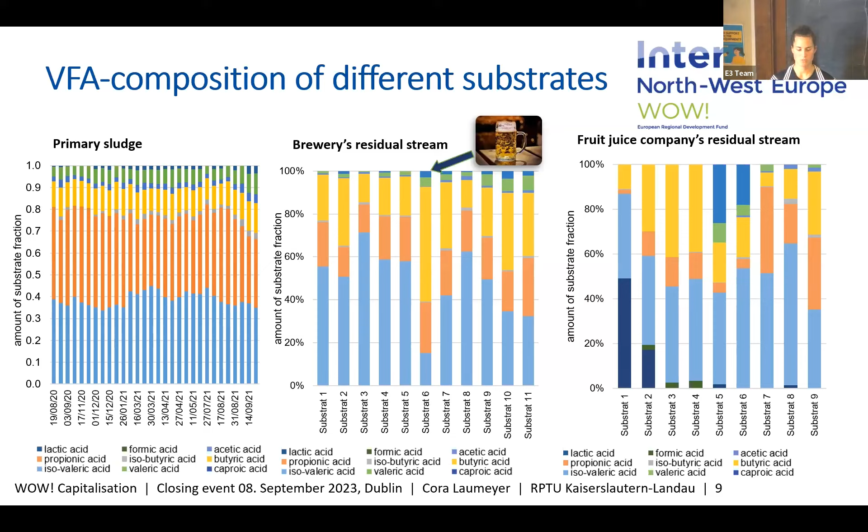To conclude, different residual streams result in different substrates, or a different VFA composition within the substrates. Also, not only is there a difference between substrates of different residual streams, but also between different batches - you can't say one residual stream always has the same composition after acidification. The primary sludge yields a quite stable VFA composition throughout the year, while the residual stream of the fruit juice company resulted in higher VFA concentrations, but also a lower ratio of VFAs compared to the soluble COD.

Now looking at the PHA composition achieved using those different substrates, I'll talk about the monomeric composition - hydroxybutyrate and hydroxyvalerate, measured by gas chromatography. For the primary sludge, we see mainly the yellow part, HV, produced in all cases, while for the industrial residual streams that were high in sugar, we produced mainly HB. That's interesting if we want to adjust the different properties of the polymer produced.

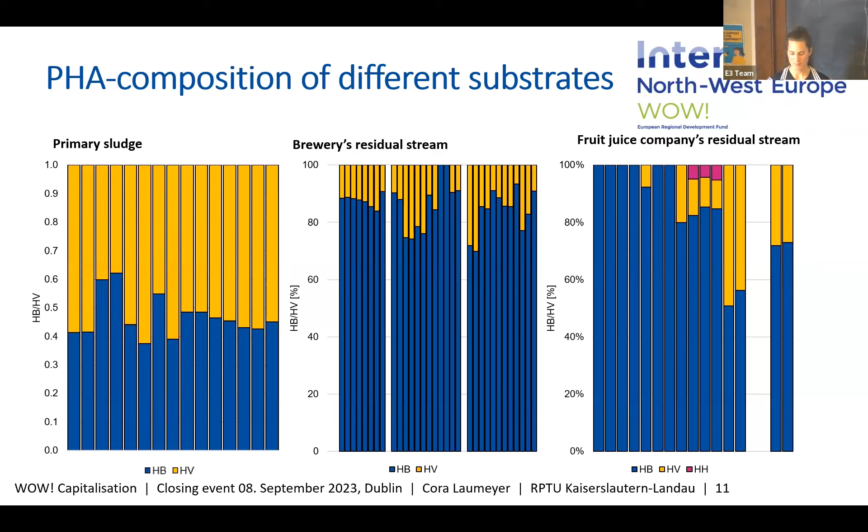The PHA produced from fruit juice also did not only achieve PHB and PHV, but also HH, hydroxyhexanoate, which opens a whole new range of possibilities we want to explore in future projects. The future objective will be to adjust the composition - we've now shown it's possible to produce PHA, but we also want to try and turn the different screws to make it suitable for application.

Now coming to the take-home messages and the outlook. As I said before, for the municipal sewage treatment plant, we have stable VFA and PHA compositions throughout the year, also during the winter, and there aid flows were not necessary. But some questions still remain, mostly the impact of the non-VFA COD on the enrichment and accumulation, and also strategies on the dry matter concentration.

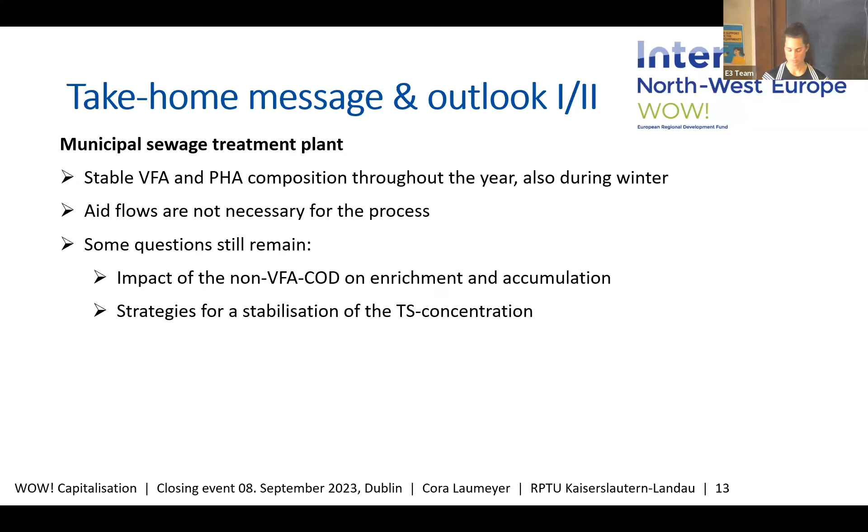While for the industrial wastewater, we see that the substrate composition fluctuates depending on the residual stream and the process, and also that the fruit juice wastewater achieved a PHA content which was very high, above 60% of the organic dry matter. Depending on the residual stream, the addition of nutrients is essential to have this process working.

Lastly, for the produced PHA and the possible impact on the product properties, we are sure that there are new application possibilities with the PHA we are producing from our residual streams due to the synthesis of copolymers. So here we can see PHB and PHV from primary sludge, and also the addition of hexanoate with fruit juice or industrial sewage. I think we'll come to that in a bit with the impact of the PHA composition on the product quality, which Ozzy will talk about.

And I think what's mostly important is that PHA has a high potential for substituting PE, which is a very common polymer applied today. So I think we're just getting started with the whole process.

There are research questions and challenges for the upscaling. This is just a few, but you can read a lot more about that in the report that will be online at the end of the month. I also want to take the opportunity to thank everybody involved in the project, for bearing with me during the operation of the pilot plant, and also the support from the whole WOW team. It was a pleasure working with you.

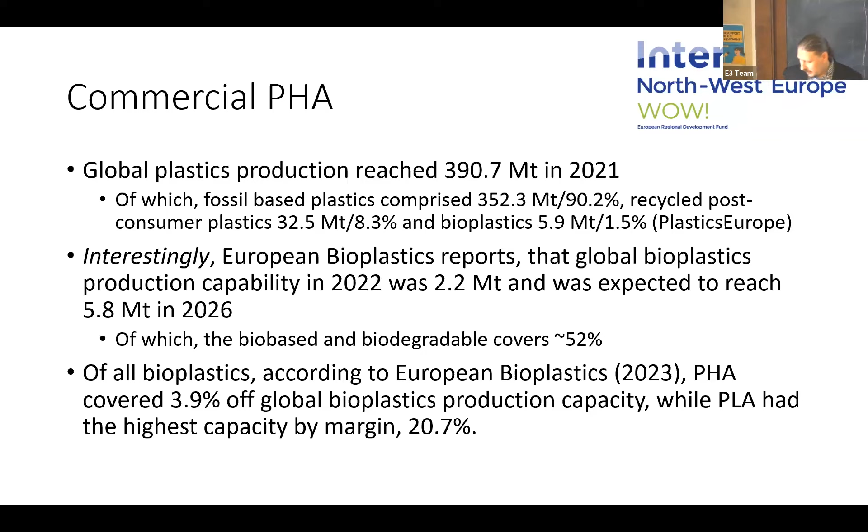Regarding PHAs, as mentioned, it's a group of different types of monomers, and it's a quite versatile group of polymers. The properties vary, which means we can also tailor the properties of PHAs. That's something we've already learned from Cora, that the properties of PHA vary, and in my opinion it means we can tailor them to suit different needs and different applications.

The properties are very well comparable to the most used volume plastics, polyethylene and polypropylene. Only the density of PHAs is higher. But what about the things PHA is currently used for? What applications does PHA currently go to?

Packaging is the largest use. Agriculture and horticulture comes in second. Consumer goods, different items, is probably something I'll show you later on. Coatings, adhesives, and others have pretty much the same value, 6,000 tons.

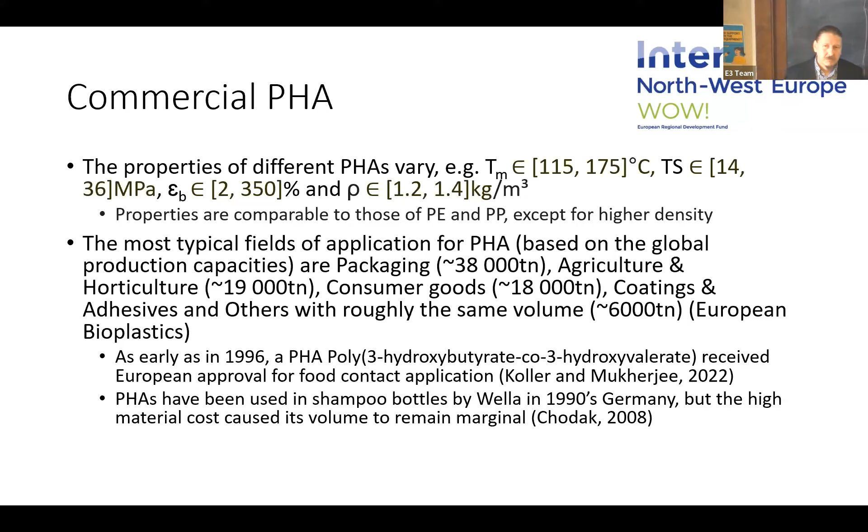Just some ideas of where PHAs are actually used: in packaging and the food industry, there are wrappings, disposable food utensils. As we know, PHAs are typically compostable. Also, PHA oligomers can be used as ketone sources in food supplements.

So there are quite a lot of interesting applications. In coatings, paper can be made more glossy, giving it more brightness. In textiles, you can create fibers from PHA, since PHAs are a type of polyester, and polyesters are used to create textile fibers and so on.

So why not PHA? Of course, someone might ask about the cost, and yeah, that might be the issue, but that's the reason we are trying to develop novel, more inexpensive, and more environmentally friendly sources and methods for creating PHA.

And in construction materials - in the statistics it was listed as none, but this was quite interesting - adding PHA in concrete can give it self-healing properties, so that crack propagation will stop and it can grow and stop seepage through the concrete. That is one application where PHA quality is not an issue. As you can imagine, very low quality PHA is fine if it's put in concrete. It doesn't really matter, it doesn't have to be pure or have strong mechanical properties, because it's used pretty much as a nutrient.

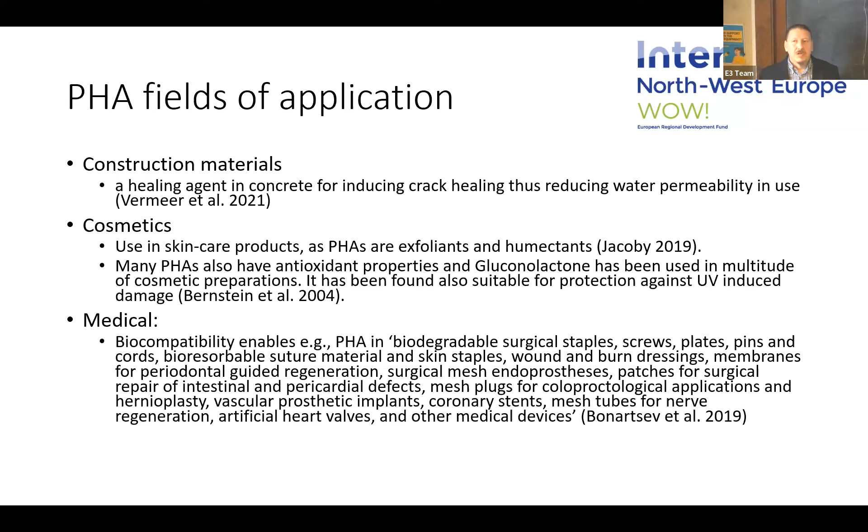Such as surgical staples, also heart valves, artificial heart valves, vascular implants, and so on. So I'd say PHA has quite a lot of interesting properties that could be and can be utilized in very, very many different fields of application.

Okay, now about the demo products we have made. Of course we have to take into consideration that the PHA we are using is not purified - it's derived from waste and so on. We are trying to figure out how to use it as much as it is, utilizing the compostability and other properties it has, while taking into account its limitations. So we ended up with different outdoor applications, which I'll show next.

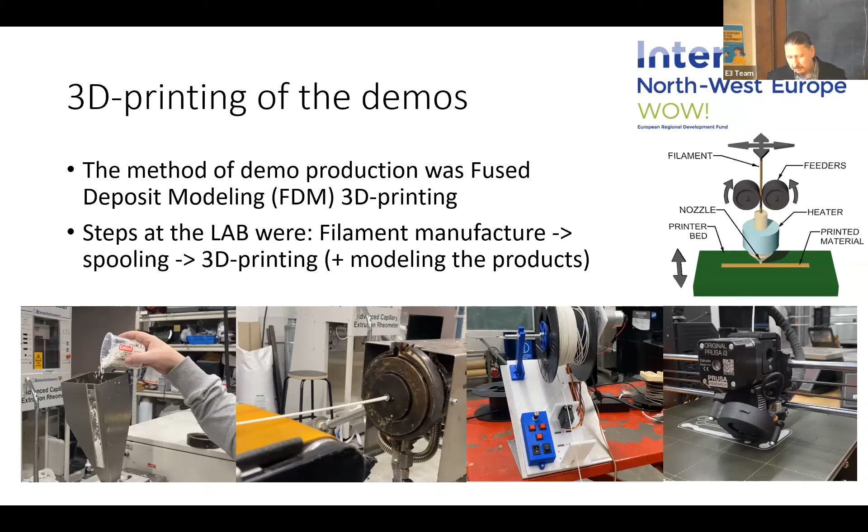We produced them via 3D printing, FDM printing in this case. We first produced filament and then printed out the demo products. This is pretty much the process we used: on the top right corner is the FDM printer, and on the bottom is the process we did to produce the filament. On the left, we insert the ground PHA into our laboratory extruder, extrude it into filament, spool it, and then print it. That's pretty much the idea. It seems easy, but it's not always that easy.

As for the application ideas we got, one is a ski pole holder used for cross-country skiing, since ski poles have a tendency of getting lost in the wild.

So we thought that might be one good product that would utilize the compostability, and for which the properties of this waste-derived PHA were sufficient. I also found out some numbers of the market sizes, so there are markets for these applications.

The other one was a fender or mudguard for mountain bikes. We found that these fenders easily get lost into the wilds, so we thought that would be a very good application for compostable bioplastics. Globally, over 44 million bicycles were sold per annum in 2020, so if a few percent of these fenders are lost every year, there's quite a lot of plastic waste accumulating in nature.

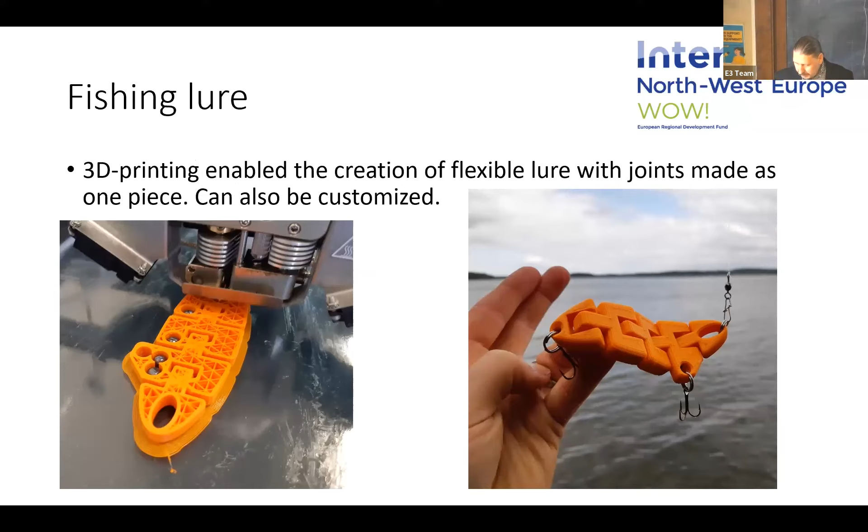About the processing, I can tell you it wasn't an easy material because it has quite a narrow processing window. We were expecting it to be more amorphous-like, but it wasn't—interestingly, brewery PHA appeared to be more heterogeneous and rubbery. One big issue was that these wastewater-derived PHAs had, and still have, a very strong stench—they smell horrible. That's something we need to address in order to be able to sell these products to anyone, so we have to blend the materials.

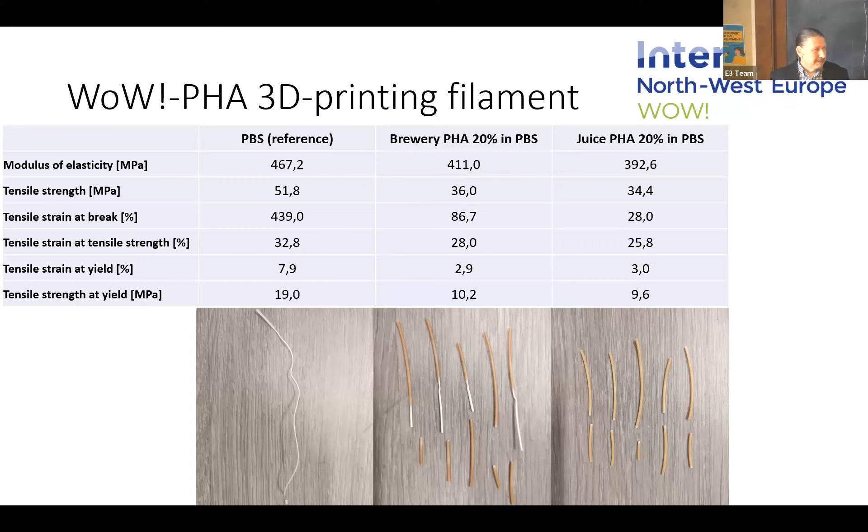These are the ideas of the PHA and WOW PHA printing filaments and their properties compared to polybutylene succinate as a reference—there are quite different properties between the PHAs and also with the PBS. You can produce filament with certain properties, though I don't yet have results from the actual test specimens printed out of these materials, but we have three weeks left, so no problem. This gives some idea of how it looks, how the filaments look.

Not bad, but it was interesting—this brownish orange color was also achieved by using these waste-derived PHAs.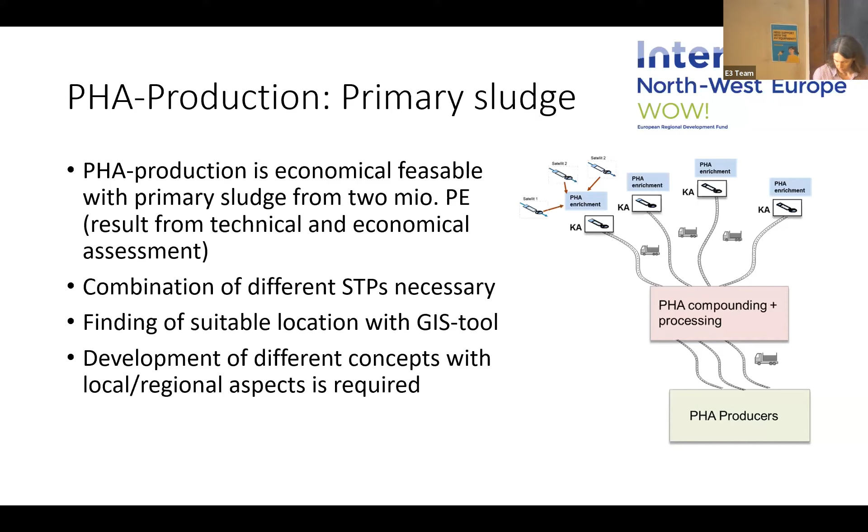Jeppe already told us about the use of primary sludge for PHA production, and Pura shows results that we get a very stable PHA composition with this source. We show it's economically feasible to use primary sludge, using 2 million population equivalents, and we have to combine different wastewater treatment plants. I want to present two concepts from our report. On the website you see different ideas, but I'll focus on two: transporting primary sludge directly to a PHA compounding and processing plant, or building PHA enrichment plants directly at the wastewater treatment plant and transporting the PHA-enriched biomass with higher dry solid concentration. Here in this table I show the pros and cons of the different concepts.

When you transport primary sludge directly to the central plant, we already see from the GIS results that we need a huge amount of transport kilometers and higher transport costs, which is a negative point. But having only one central plant means lower costs for the plant since you need less infrastructure. On the other hand, with PHA-rich biomass transport, you need to transport less sludge, but at each wastewater treatment plant you need an installation and operational staff, so this is more negative. In the evaluation we see which idea is better depending on where the higher installation costs are.

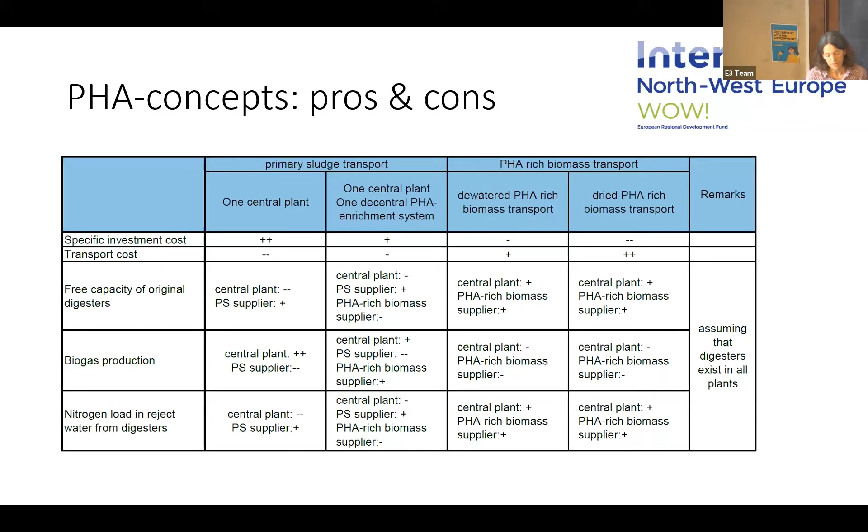Perhaps one point I want to focus on is biogas production. When you take the primary sludge away from one plant to a central plant, you get more biogas production there, but the other plant has less. You also have the nitrogen load from the digester, which has a higher load to the wastewater treatment plant when you have a central plant there.

Here you transport primary sludge with 5% dry matter. In the second concept, you have at each wastewater treatment plant the PHA accumulation, and then you transport the PHA rich biomass with a dry matter content of 30%. We also investigated drying it directly at the wastewater treatment plant to get a dry matter of 90%, but this I don't show here in the presentation today.

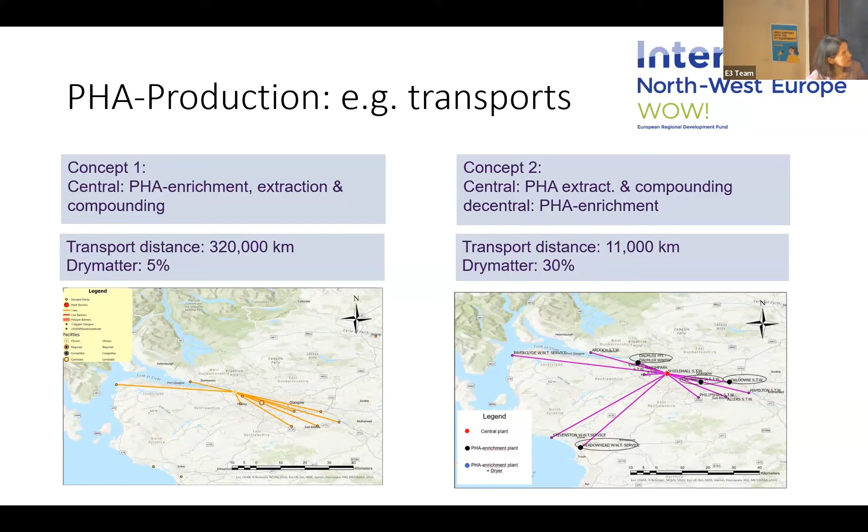So here you see the results from the GIS solution. You see the different transport distances, from 320,000 to 11,000 kilometers, for the two concepts.

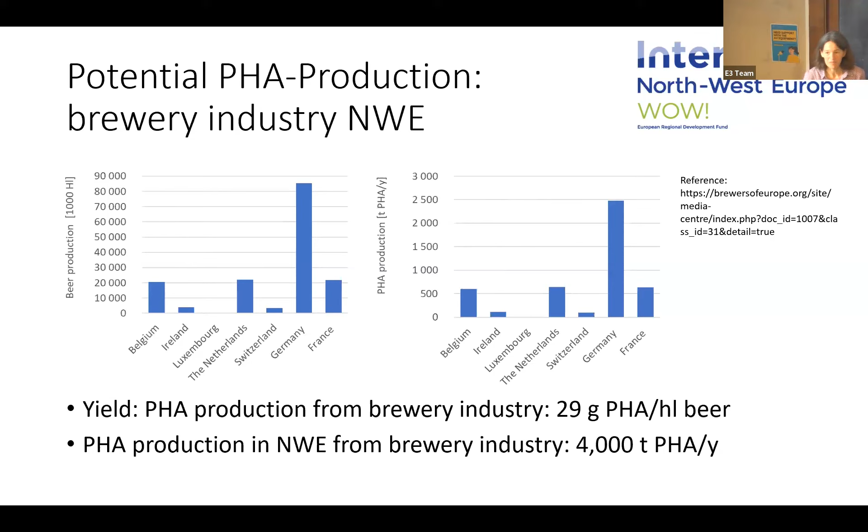So how could we implement a PHA enrichment plant at the brewery? The idea is not to do the extraction at the brewery site, we would only do the PHA enrichment. The blue boxes on the left show the normal process at a brewery site: wastewater first comes into a mixing and balancing tank, then sometimes a fermentation tank, which isn't always there but is at this plant. Then you have a UASB or IC reactor for anaerobic treatment of the brewery waste, and afterwards you always need aerobic treatment so you can discharge the effluent to the river.

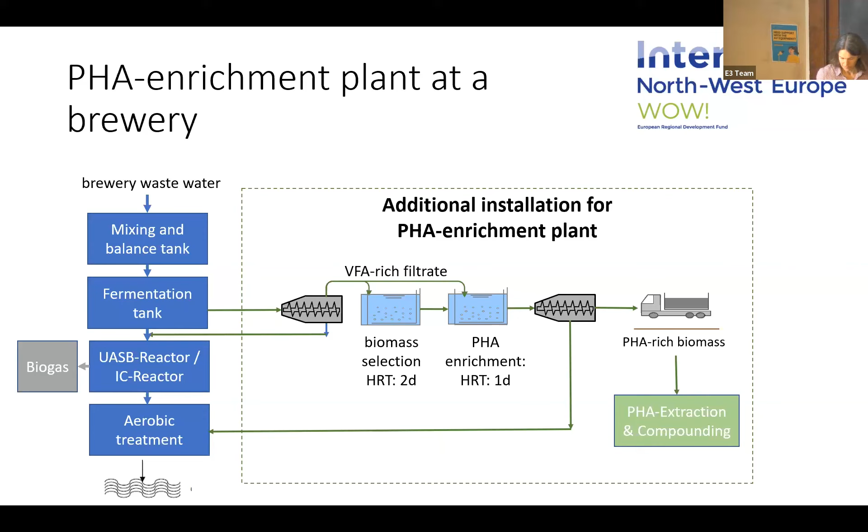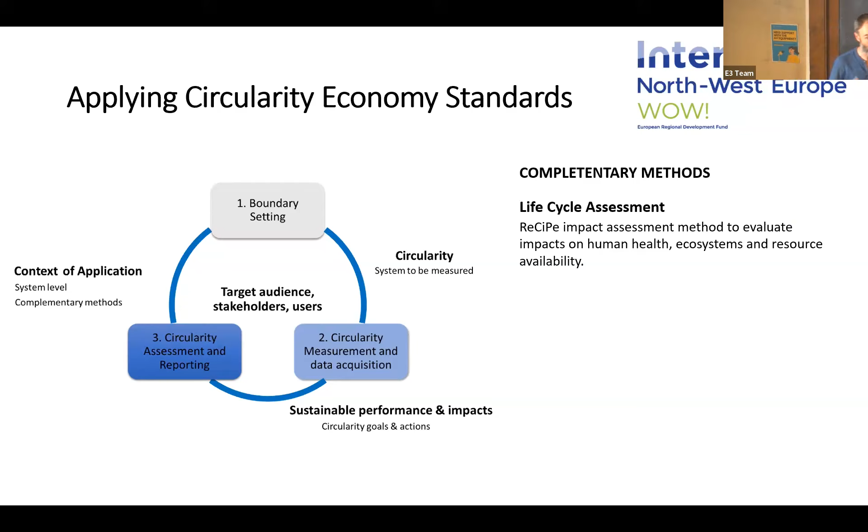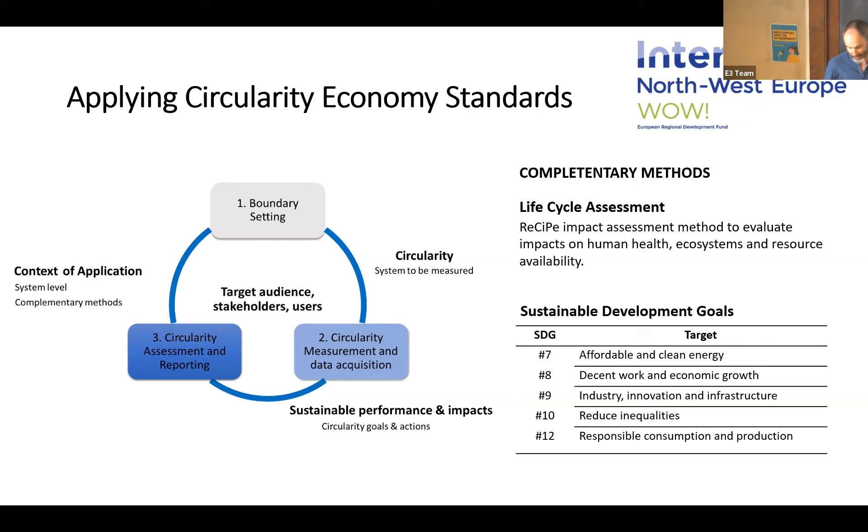So there is a framework, and I will go through the process very briefly, but there's complementary methods around life cycle assessment, which addresses the environmental aspects and is something that has been in existence for a number of years with ISO standards, but also the sustainable development goals. Everything trying to be holistic in terms of how we're connecting to sustainable development.

So within this exercise, we wanted to look at the valorization of PHA as a byproduct from primary sludge. But we also wanted to recognize that there's other pathways as well. And the other pathways exist, as mentioned earlier today, and we have decisions to make, perhaps. So we considered the production of PHA cake as a potential replacement of biopolymers, given the huge market potential that was highlighted by Ozzy earlier. But also then we must remember that there's a disruption to biogas production. Not necessarily completely, but there's other pathways.

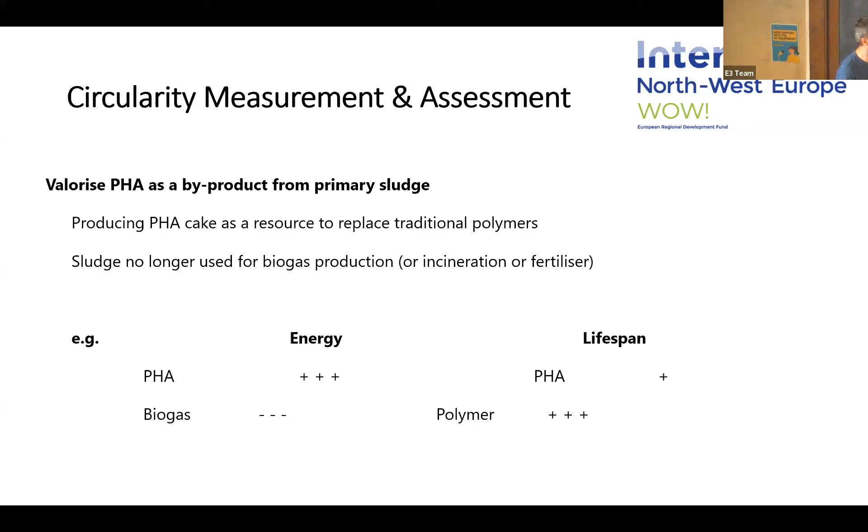So there's pros and cons. There's pros and cons around energy and lifespan, and we'll try to address that within the study. And also when it comes to the idea of applying biogas or using biogas or creating polymers, the lifespan of PHA may or may not, and has that flexibility to deliver that, while energy, you have to consume energy to make the product, versus biogas where you actually have a producer.

So taking the study from earlier, taking the case study of Scotland that you're familiar with from our previous presentation, we took those scenarios, centralized, decentralized, and standalone situation. Each offering different costs to set up, different environmental impacts perhaps in its implementation, but also different social considerations were taken into account in the exercise as well. But the end goal was to try and select a number of metrics or indicators that capture those.

I won't get into the detail of this framework, but essentially the system in focus was what we were looking at, PHA cake production. And we recognize that it sits in a sustainable environment, an economic system, a social system, an environmental system.

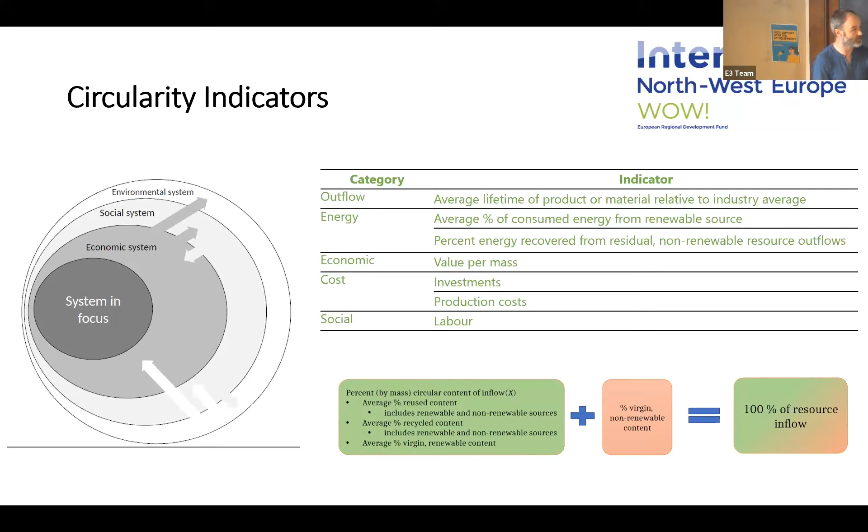So the current standards are going to be released this year. So we explored what exists in the draft frameworks around flows of resources, and that's key to circular economy. It's about flows of resources, but then taking into account the energy considerations, the economic, and the social, with life cycle assessment offering the environmental perspective as well.

So to try and keep it very brief, I framed the findings around 4 different criteria. The first was the resources. And to comments earlier, the lifespan of PHA can compete with traditional polymers, and the results indicate that as a flow of resources. But we must remember, as a circular resource, it's so important that it degrades.

The circular economy standards were created so that a replacement product could offer the same quality as its predecessor, PE, as mentioned earlier, as a potential replacement. But PE has its downfalls in terms of environment. So therefore, do we want it to have the same lifespan? And it was so important to hear the different avenues that it can take to help target that. So some of the findings tried to position the PHA as a resource.

But I think what was important around the other metrics was to address the economics. Essentially, in the scenario that we looked at to produce a unit or a metric ton of PHA, we can see comparison to PE and to recycled plastics. The costs are still much higher than what the alternatives are.

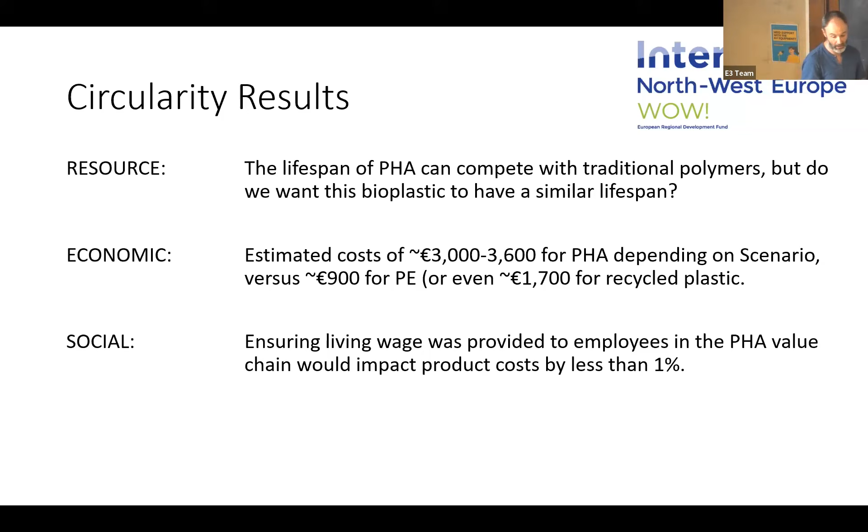From a social perspective, having looked at Scotland, we took the previous results and ensured that the quality of pay, such as taking into consideration living wage, is extremely important. In the context of this study, this was a metric which actually increased the price of production by a proportion.

But the social dimension for other resources could look at the quality of life that people have, if it was a finite resource taken into account in product production, like chemicals, depending on where they come from, how they're produced, and the people responsible for processing them. In Scotland's scenario, ensuring the welfare of the people involved in the process only increased the cost by less than 1%.

And lastly, the environmental dimension, which I'll come on to in a moment, was to ensure that in comparison to biogas and traditional polymers like PE, is it really environmentally a good decision?

So just a very summarized version, and we will have a much more expanded set of results within the report. We have to take into account the infrastructure as well. The findings demonstrated where the hotspot is, where we need to focus our attention to try and reduce the cost but also reduce the environmental impacts.

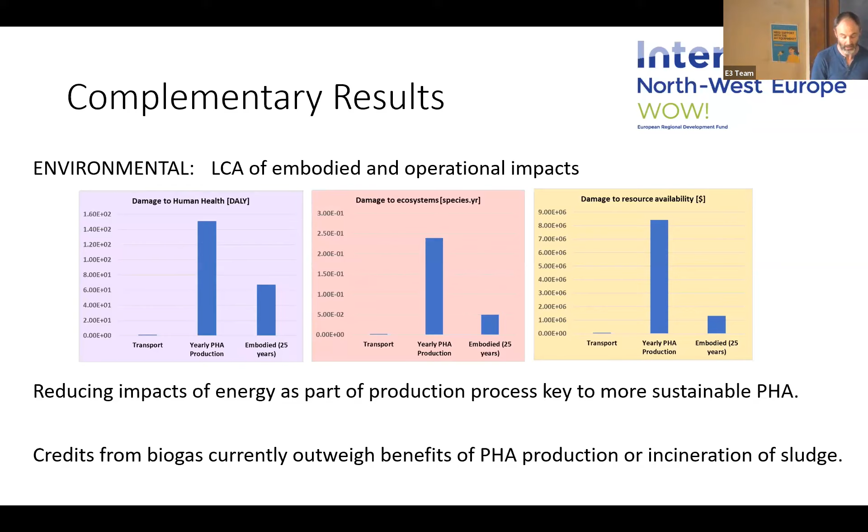In terms of biogas, that's also the challenge. Biogas is an energy producer which is extremely valuable to society at the moment, and if we lose part of that by transforming into PHA, the question is how do we integrate? How do we holistically produce the best of both?

And that's kind of a summary of the conclusions. Just to close, I suppose the Scotland case study is a unique scenario, and we need to expand beyond it to other regions to explore centralized, decentralized, and indeed standalone approaches. Comments earlier about different contexts, like Eastern Germany, being more centralized, would perhaps provide more opportunities.

The standards are new and can be applied to bioproducts, but what is key is that in the future there will be circularity product declaration sheets, a stamp of approval for your product that it's circular in nature. And bioproducts have a huge market opportunity to lead in that space.

What is great about circular economy is that we're thinking holistically about sustainability, economics, environmental and social dimensions. The assessment has presented opportunities and indeed barriers, but now is the time that the barriers are presented and addressed to ensure that we create sustainable products in this space going forward, and it can be of value to different stakeholders in the direction they take.

So that concludes my presentation. Thank you to the WOW team. I hope that this sets the tone for where PHA goes, and I'll perhaps hand over to Jappe for any closing questions.